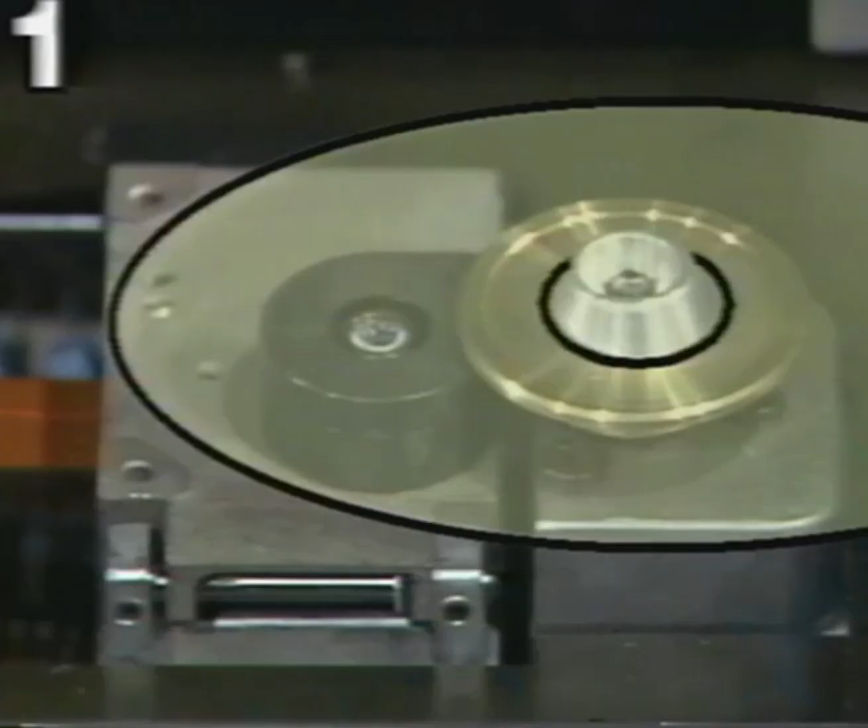The CD player uses a sharply focused beam of light from an integrated laser pickup assembly for the same purpose. Just as the condition of the stylus determines the quality of the signal extracted from a recording, the degree of focus and the intensity of the light beam affect the quality and amplitude of disc signals. If the beam is severely out of focus, the extracted signals are marginal and can result in skipping or no audio, symptoms very similar to those of a worn stylus.

Alignment of the stylus with the grooves cut into a recording is largely a mechanical function, requiring only that the tone arm be weighted in some manner so that the stylus tracks and stays within the groove and does not skip from one groove to another. An adjustable tone arm weight is generally used for this purpose.

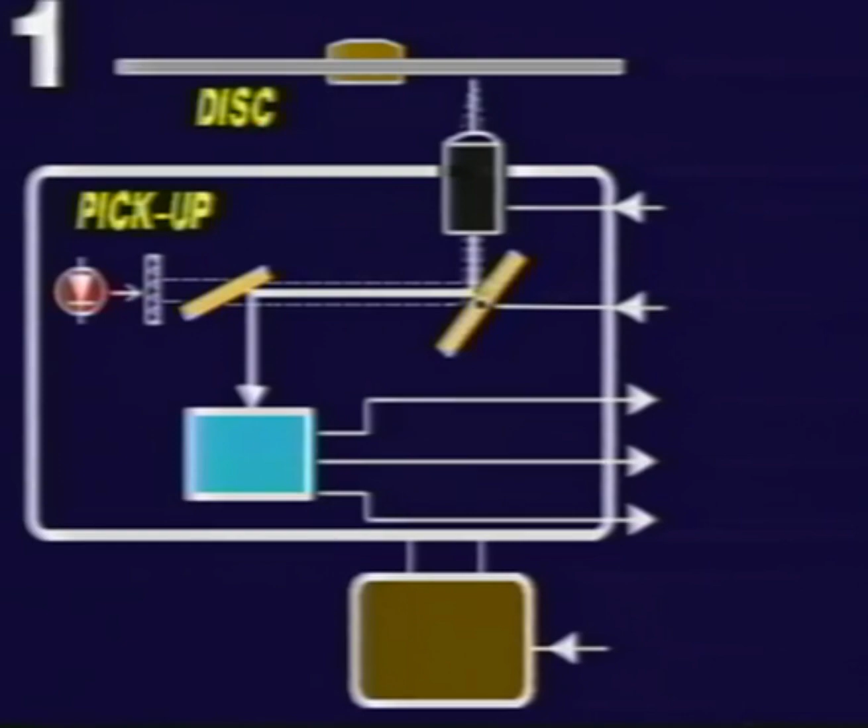Compact discs do not have grooves, nor does the pickup device directly contact the surface of the disc. Additional beams of light from the laser pickup are used to determine and correct the position of the pickup by feeding information to a tracking circuit within the player. Tracking error signals are generated by the pickup assembly, amplified by the tracking circuitry, and directed back to the pickup to control the internal tracking device.

If tracking correction is too great, the CD player generally registers error. Insufficient tracking correction will result in track skipping. A detailed description of the tracking circuitry is found in Section 4 of the tape.

To summarize, then, CD players must coordinate 4 functions in order to play a disc: 1. Activate the laser. 2. Focus the laser beam. 3. Apply tracking control to the pickup assembly. And 4. Activate the disk drive system to rotate and control the speed of the disk. Let's take a look now at the sequence of operations as applied to a typical CD player.

Most players follow one of 2 basic operational sequences. The first operational format automatically reads a table of contents at the start of the disk as soon as the disk is inserted into the player. When the table of contents is read, the player goes into the stop mode. The play button must then be pressed to engage normal play.

The second operational format does not automatically read the table of contents when a disk is inserted. When the play button is pressed, the table of contents is read and the unit automatically engages the play mode. Both formats are operationally similar with these exceptions. For the purpose of explanation, we will concentrate on the first operational format.

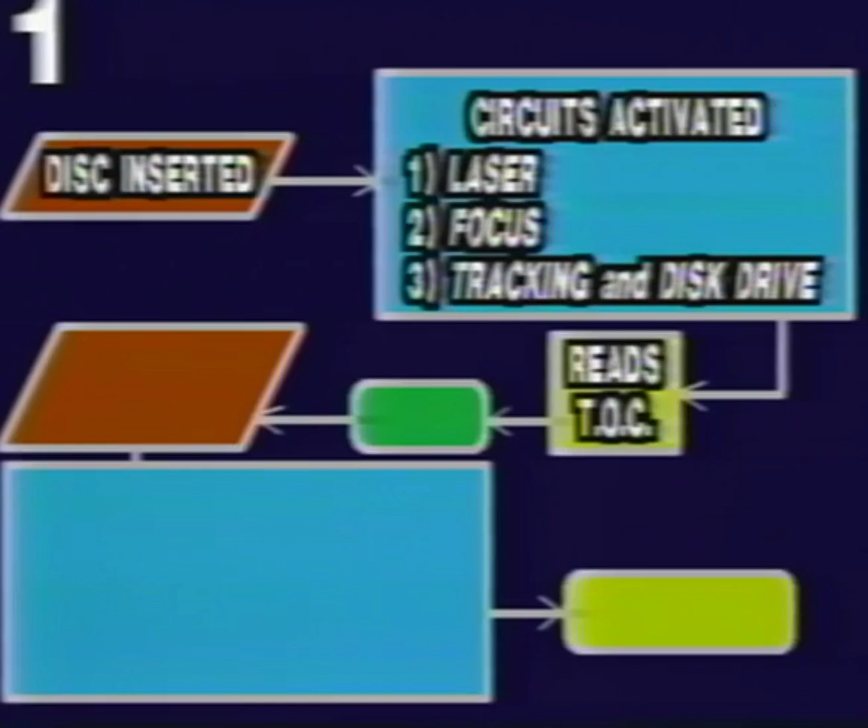When a disc is inserted in the player, the laser diode in the pickup assembly is activated. At the same time, the focus circuitry is enabled. The unit searches for good focus, and when found, the tracking and disk drive circuits are activated. The disc rotates and the table of contents is read, after which the player goes into the stop mode. When the play button is pressed, the laser, focus, tracking, and disk drive circuits are activated, and the disc is played.

Now let's correlate the sequence of operation with the overall block diagram of a typical compact disc player. When a disc is inserted, the laser diode is activated.

If no light is emitted from the laser, the unit registers error and goes into the stop mode. If the amount of light is insufficient, or laser power is low, the unit might play, but will intermittently register error and stop, or intermittently skip tracks while playing. Laser power measurement and adjustments are covered in Section 2 of the tape.

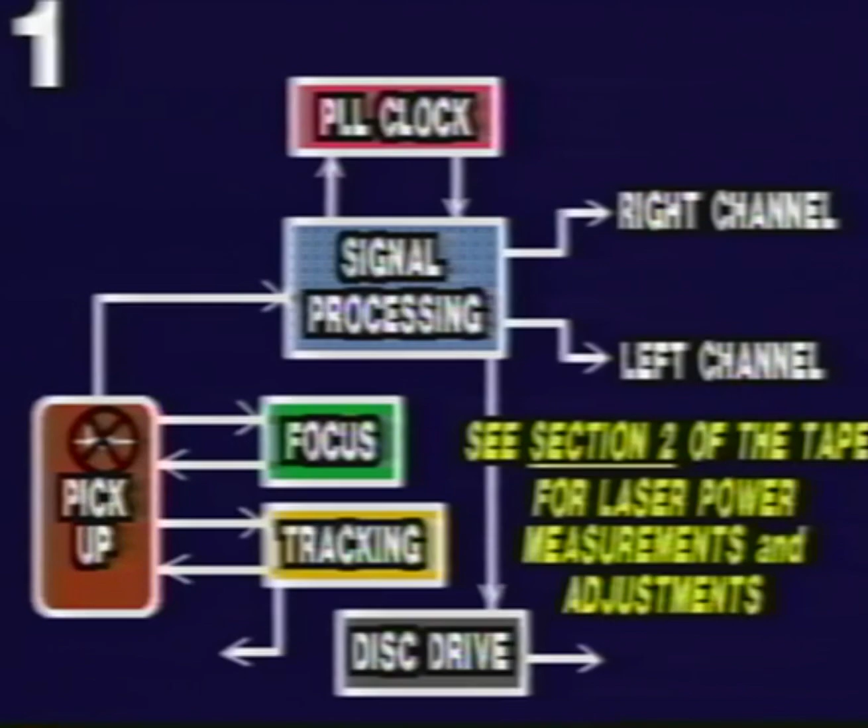The focus circuitry is activated at the same time as the laser diode. When the focus circuitry is activated, it searches for good focus, and when found, amplifies the focus error voltage from the pickup assembly and applies it back to the lens control circuitry in the pickup. If good focus is not found, the unit registers error and goes into the stop mode before the disc rotates.

If focus is found, the tracking and disk drive circuits are enabled, allowing the disk to rotate, and the table of contents is read. The player will engage the stop mode following this operation. If focus is not maintained, the disk will rotate momentarily, but the table of contents will not be read and the unit will register error. The focus circuitry is described in detail in Section 3 of the tape.

Even if a tracking or disk drive problem exists, the table of contents will usually be read. However, the unit will usually register error and stop when the play mode is engaged. Pressing the play button activates the play mode by enabling the laser diode, focus, tracking, and disk drive circuitry.

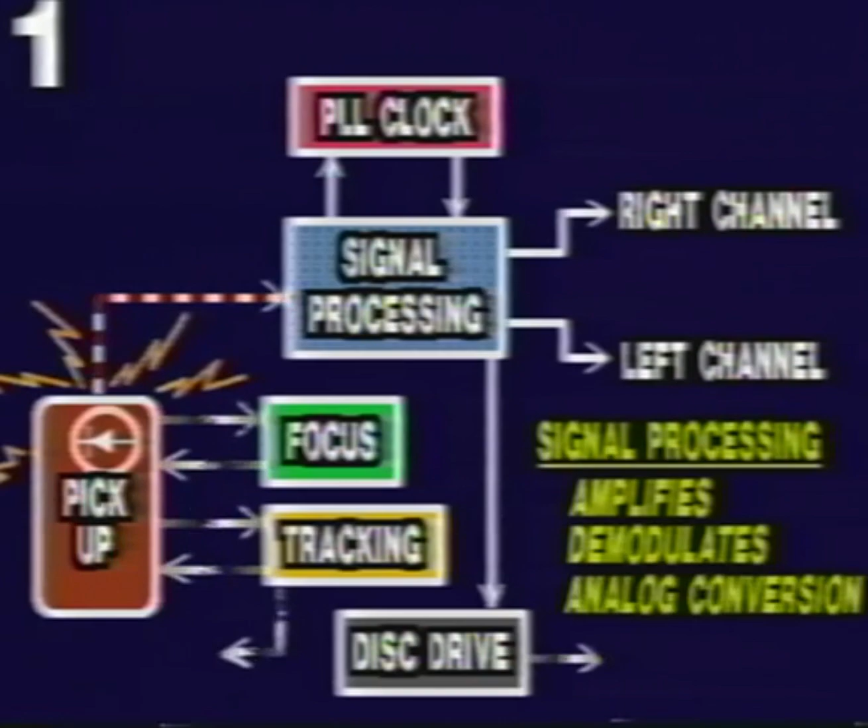The signal processing circuitry in a disk player receives the digital data from the disk and amplifies, demodulates, and converts it to analog right and left channel signals.

The PLL clock circuitry generates a 4.321 MHz signal that is synchronized to the digital data from the disk. The clock signal is required in the demodulation process and is also directed to the disk drive circuitry. An incorrect PLL clock frequency would denote incorrect disk rotational speed.

The digital signal from the pickup is viewable after amplification. The wave shape is an eye-pattern waveform and is referred to as the high-frequency HF signal or the radio frequency RF signal, depending on the specific model disk player. The eye-pattern waveform is one of the more common signals used during alignment. It is used when performing many of the servo circuitry and pickup assembly adjustments.

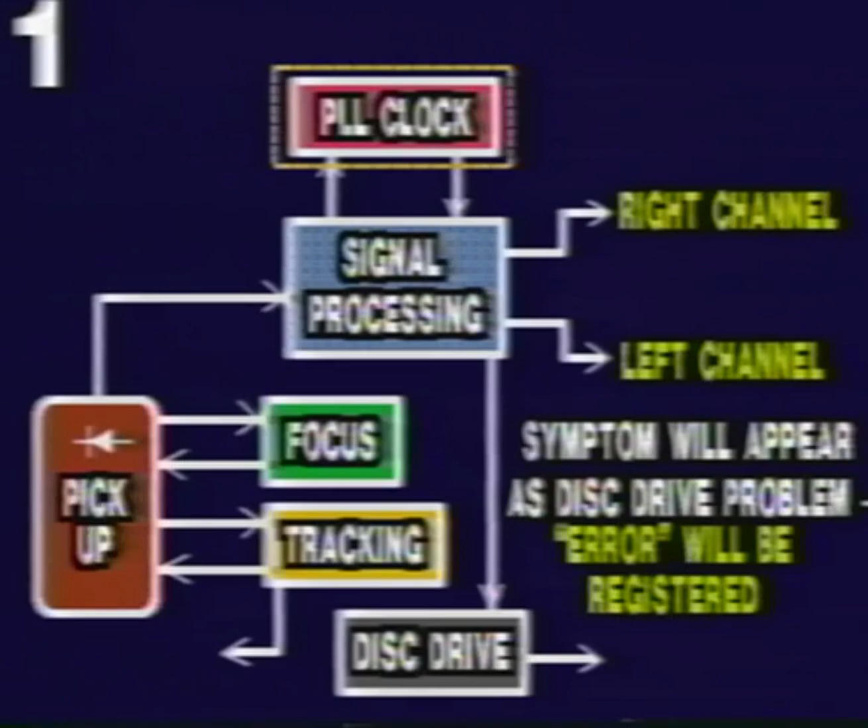Problems in the signal processing circuitry are rare. If one does exist, the unit will usually remain in the play mode, and the problem will be apparent in the reproduced audio. If a problem exists in the PLL clock circuitry, it would appear as a disk drive problem, and error would be registered.

On most compact disc players, the laser power emitted from the pickup lens is very low, approximately 0.3 to 0.4 milliwatts. In addition, the focal point of the beam is only 1 millimeter away from the lens. With the low power level and extremely close focal point, there is little chance of injury from the laser. However, as a safeguard, we suggest not looking back through the lens at the laser.

The pickup assembly itself is not considered serviceable and is treated as an individual component. However, it must be remembered that the pickup assembly is tied to 4 major external circuits: laser power control, signal processing, focus, and tracking. All external circuitry should be eliminated as the cause of the problem before pickup assembly replacement is considered. In addition, there are several mechanical adjustments affecting the operation of the pickup assembly.

Mitsubishi has used 2 basic types of pickup assemblies: an earlier version which incorporates a tracking mirror, and a later version that has no tracking mirror but a complete self-contained optical unit within the assembly. This is a simplified drawing of an earlier version pickup assembly.

When enabled, the laser diode generates light which is directed to a diffraction grating or plate. The grating splits the laser beam into 3 separate beams. The center beam is utilized to convey digital data and focus error data.

The digital data from the disk forms the HF signal, which is directed to the signal processing circuitry, and the focus error signal is applied to the focus circuitry. The 2 outer beams are used to form the tracking error signal, which is directed to the tracking circuitry. On the majority of CD players, the diffraction grating is adjustable and does have a great effect on tracking.

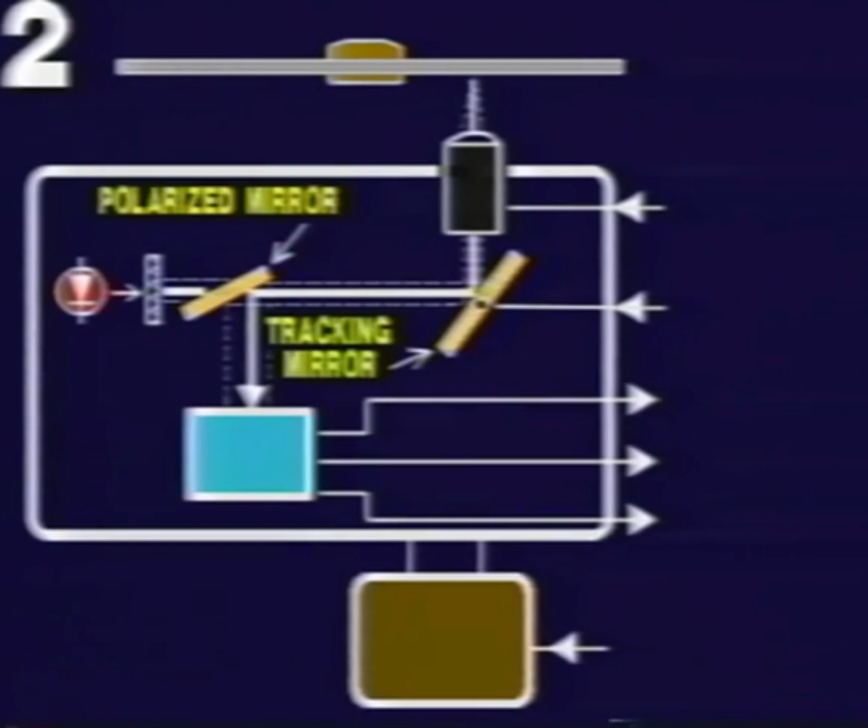All 3 beams from the diffraction grating pass through a polarized mirror to the tracking mirror. The tracking mirror deflects the beams through the lens to the disc. Reflected light from the disc passes back through the lens, is deflected by the tracking and polarized mirrors to the photodetector assembly. The photodetector converts the light signals to three electrical signals: digital data, focus error, and tracking error, that are output from the pickup.

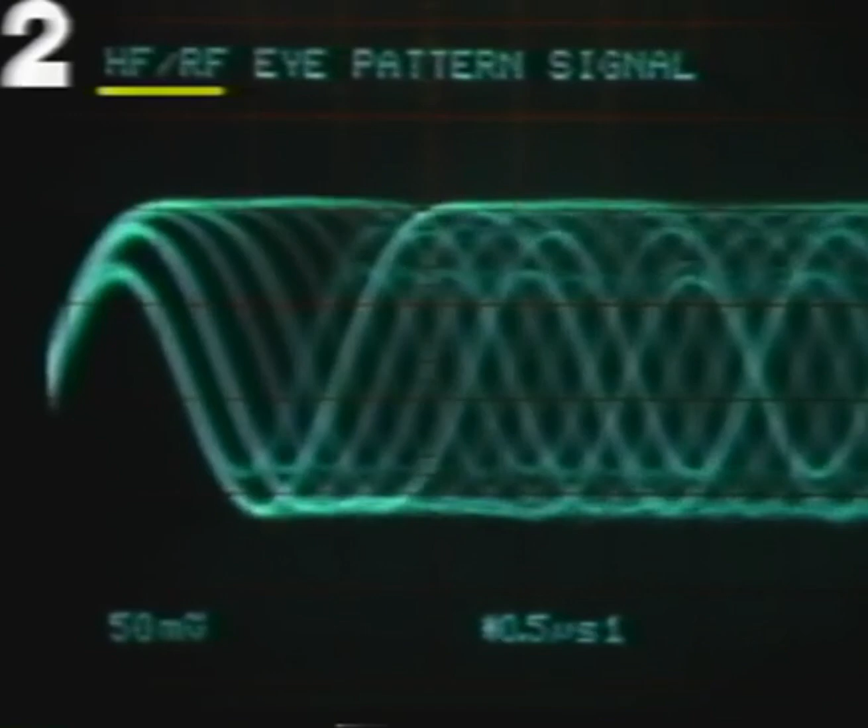The three signals are too small to view directly out of the pickup, but may be viewed after amplification. The digital signal is denoted as the high frequency HF or radio frequency RF signal. The HF signal is the familiar eye pattern used for many of the adjustments in the disc player. The focus error FE and tracking error TE signals appear to be random noise. Their amplitudes depend on the degree of error.

Focusing is achieved by moving the lens in a plane perpendicular to the disc. The lens position is controlled by the focus control FC voltage from the focus circuitry, which is covered in Section 3.

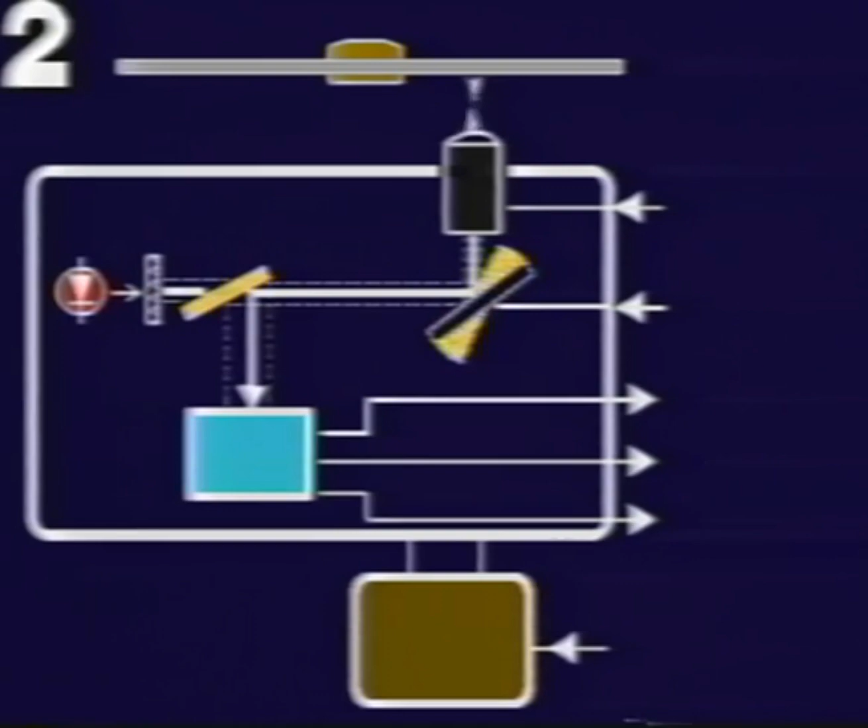Tracking is achieved by varying the inclination of the tracking mirror, which in turn moves the laser beam horizontally across the disc. When the tracking mirror reaches the end of its range, momentary drive is applied to the slide motor, which moves the complete pickup assembly slightly.

At the same time, the tracking mirror is reset to its starting position, and the cycle is repeated. The mirror inclination and slide motor are controlled by voltages developed in the tracking circuitry, covered in Section 4 of the tape.

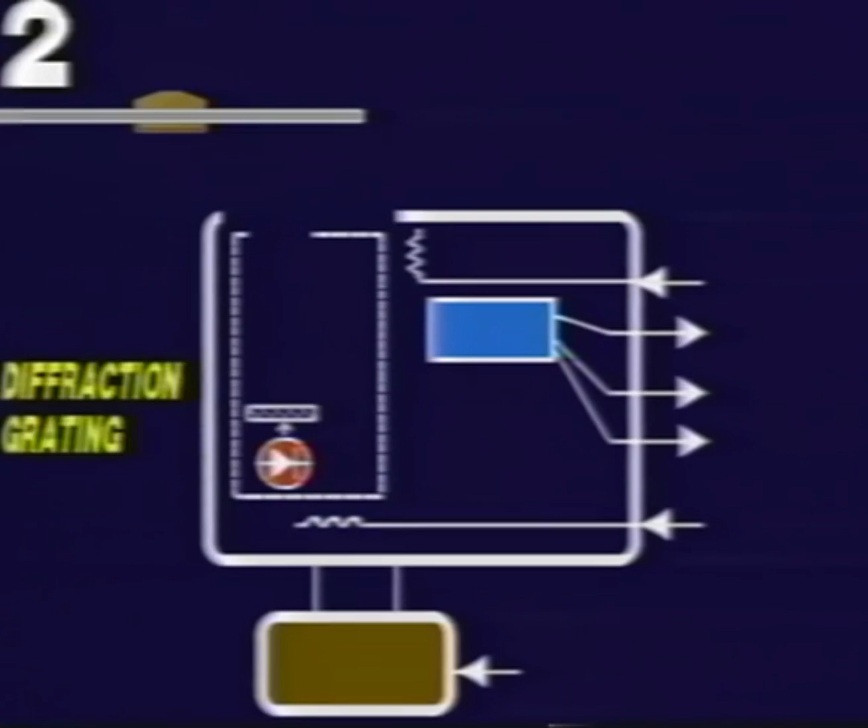On later version pickup assemblies, there is no internal tracking mirror. There is a self-contained optical unit internal to the pickup, containing the laser diode, diffraction grating, polarized mirror, lens, and photodetector.

To maintain focus and tracking, the complete optical unit is moved. Focus correction voltage moves the unit in a plane perpendicular to the disc, and tracking correction voltage moves the assembly parallel to the disc.

On the later version of pickup assemblies, the preamplifiers for the HF, focus error, and tracking error signals are internal to the pickup assembly. Therefore, all three signals may be viewed on an oscilloscope directly out of the pickup.

The amount of laser power emitted from the pickup assembly lens varies between the various model CD players. The value for each model player is given in its respective service manual.

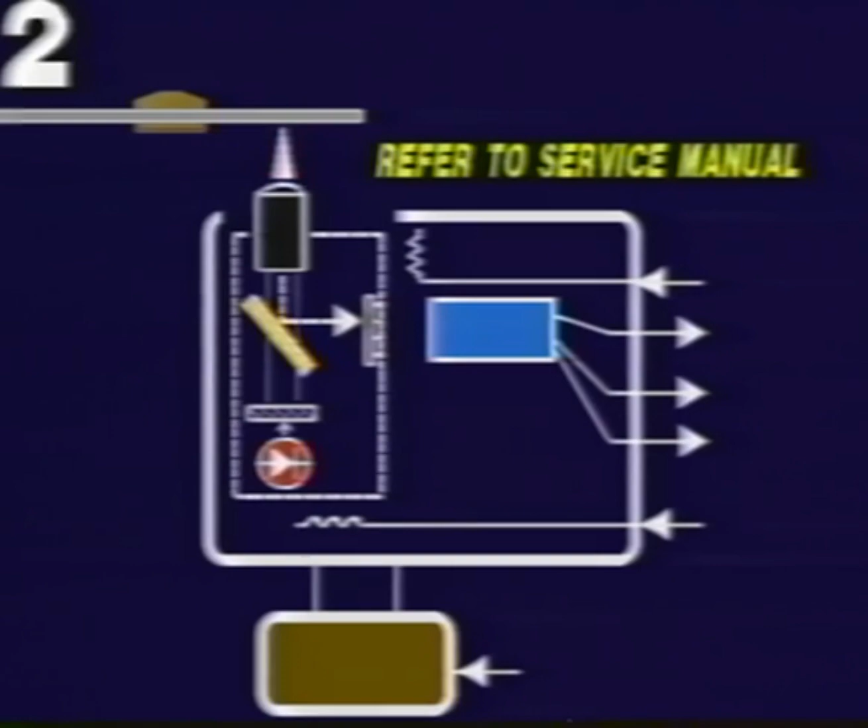If there is no laser output from the lens, the unit will register error and go into the stop mode. If the laser power is too low, focus and tracking may not be achieved, and the amplitude of the HF signal will be low. If laser power is excessive, both tracking and focus error signals will also be excessive, and usually tracking will not be maintained, causing error to be registered.

Although the procedure for checking and adjusting laser power is similar on all CD players, refer to the service manual for the specific model. Laser power is measured without inserting a disc in the unit. On some models, the disc clamp assembly must be removed to give access to the pickup lens.

To activate the laser, the disc sensor photodetector must be covered with tape. Power to the laser is usually activated by shorting two test points given in the service manual. Some units are designed with built-in test modes. Refer to the service manual for the test mode activation procedure.

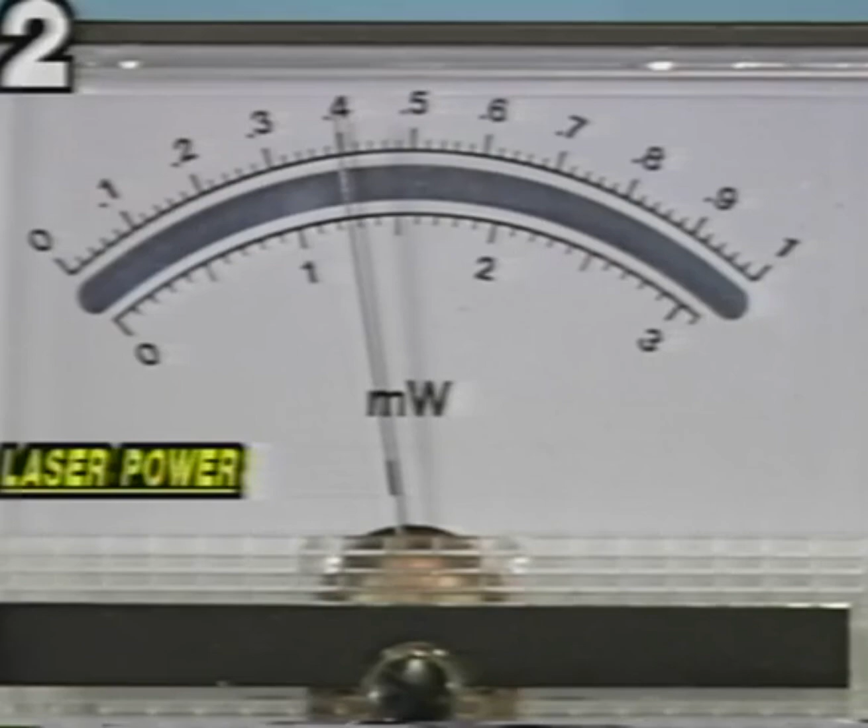When the laser is enabled, insert the laser power meter sensor in front of the lens and read the power reading on the meter. If the power is incorrect, rotate the laser power adjustment until the reading corresponds to that given in the service manual. Laser power range usually falls in the area of 0.3 milliwatts to 0.4 milliwatts.

One of the most important operations carried out by a CD player is altering the focal point of the pickup assembly to focus the laser beam. Until acceptable focus is achieved, and the microprocessor is notified of this fact, the play operation will generally be terminated.

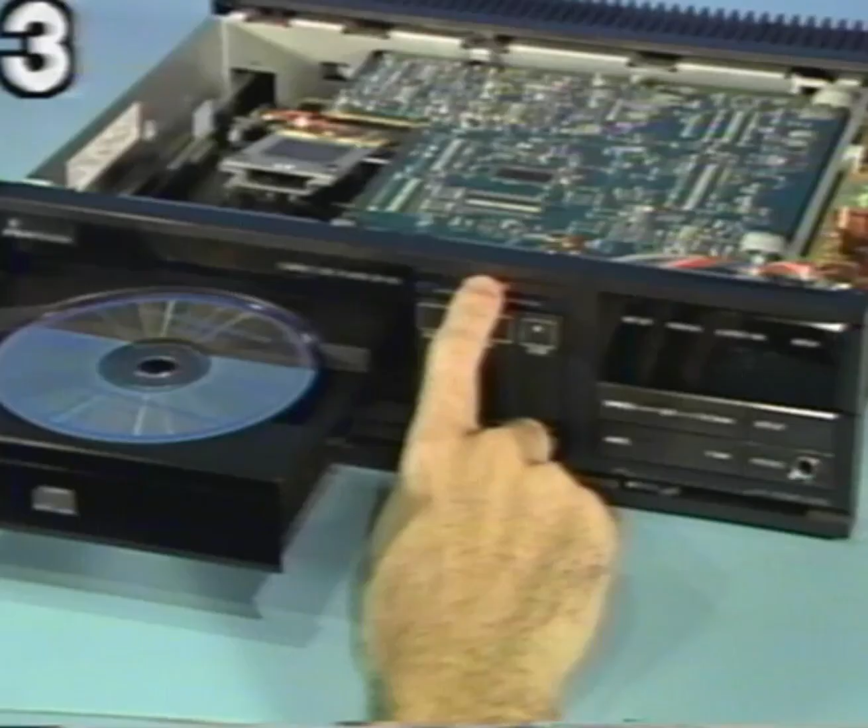This section will explain the operation of the circuitry responsible for the focusing operation, beginning with the first step in the operational sequence of the CD player, reading the table of contents on the disc.

If the disc player will not read the table of contents on a disc, it usually points to a problem in the focus circuitry, a servo system that controls the position of the pickup assembly in relation to the disc to assure that the laser beam generated by the pickup is sharply focused. A marginal focus problem may show up as track skipping or intermittently registering error during play.

A thorough understanding of the operational sequence of a CD player is extremely valuable when troubleshooting the focus servo circuitry. Therefore, let's review in greater detail the operational sequence of most disc players.

When a disc is inserted, the lens in the pickup assembly searches for good focus. On some players, focus search is not activated until the play button is pressed. If focus is not found, the unit registers error and stops.

If rough focus is achieved, the focus servo is enabled and the laser beam is precisely focused. If sharp focus is not achieved, the unit registers error and stops.

When sharp focus is achieved, the disc momentarily rotates and the table of contents is read. After the table of contents is read, the unit goes into the stop mode or directly into play, depending on the design of the player.

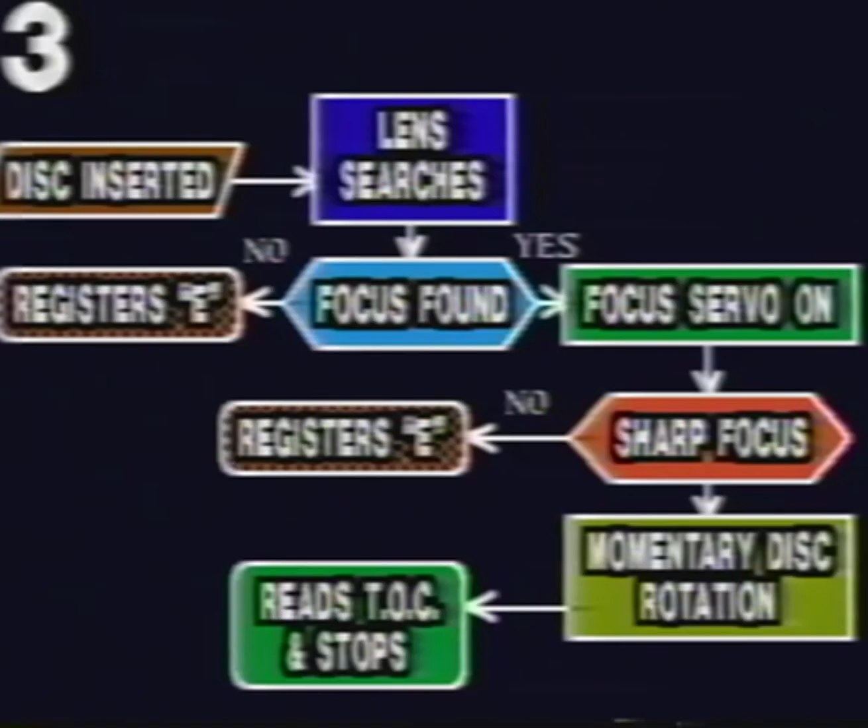Correlating the operational sequence to the basic block diagram of the focus circuitry, the drawer and disc sensors inform the control circuitry that a disc is inserted in the unit. The control circuitry responds by generating a focus search command. The search circuitry drives the lens through its range, attempting to find a rough focus point.

As the lens searches, the autofocus OK circuitry, sometimes referred to as HFOK, monitors the audio data from the disc, denoted as the high frequency or HF signal. As the focal point is approached, the HF output voltage increases. When the autofocus OK circuitry senses the presence of the HF output, it generates a logic change on the AF-OK line, informing the control circuitry that rough focus has been attained.

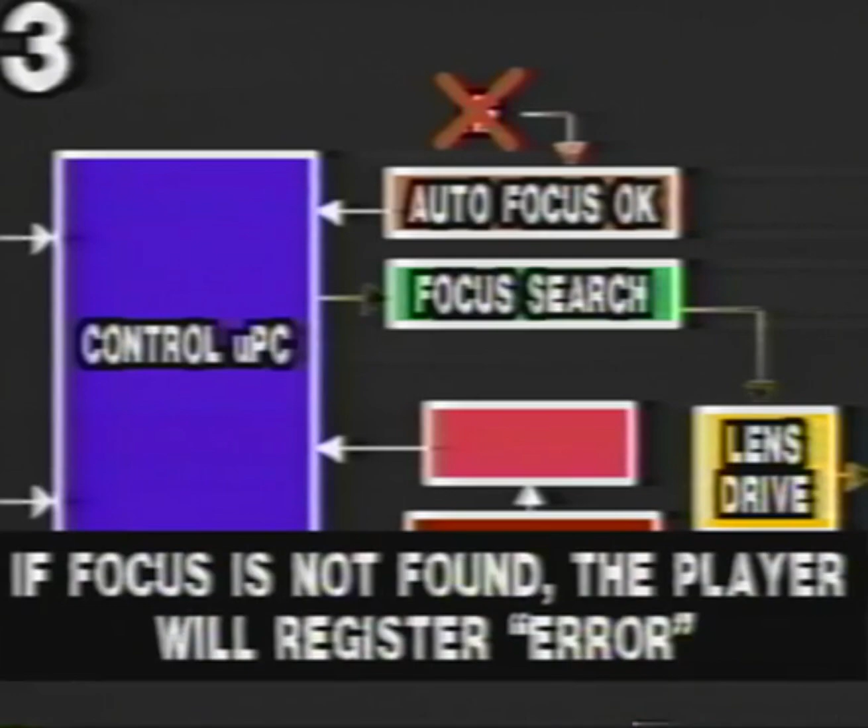If the focal point is not detected, the lens is driven through the search cycle 3 times. Following 3 search cycles, if the rough focal point is still not detected, the unit will register error and stop. Also, if the lens does not move smoothly up and down during these focus search cycles, the lens might miss the optimum focus point and the player will again register error.

Once the rough focus point is detected, the control circuitry terminates the search command and generates logic on the focus on line to enable the focus servo circuitry. The focus servo amplifies the focus error voltage from the pickup assembly and directs it to the lens drive in the pickup as the focus control, or FC, voltage.

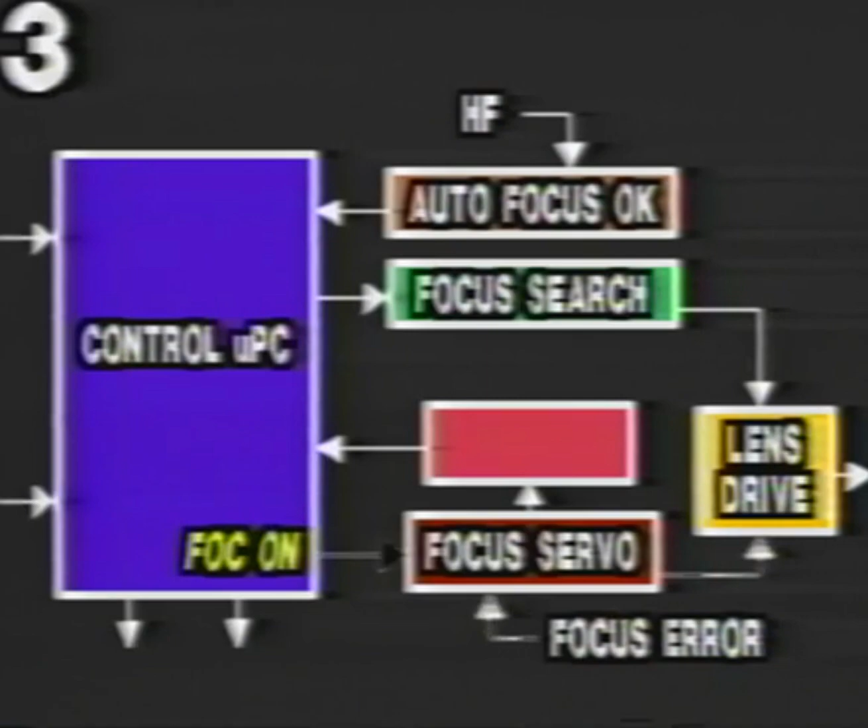When sharp focus is achieved, the focus OK circuitry generates a logic change on the focus OK line, informing the control circuitry that sharp focus has been attained. On some players, the focus OK line is denoted as focus zero cross.

The control circuitry responds to the logic change on the focus OK line by generating momentary commands, enabling the tracking and disk drive servos. The disk momentarily rotates and the table of contents is read.

On later disk players, fewer discrete components are used and most of the command and status data is transferred over serial lines. On these players, the control microprocessor is informed that a disk is inserted by the logic on the drawer sensor and disk sensor lines. The microprocessor responds by generating a focus search command.

On this type of player, all commands between the microprocessor and the servo IC are transmitted on a single serial data line, usually denoted as data out or microprocessor serial data, MSD.

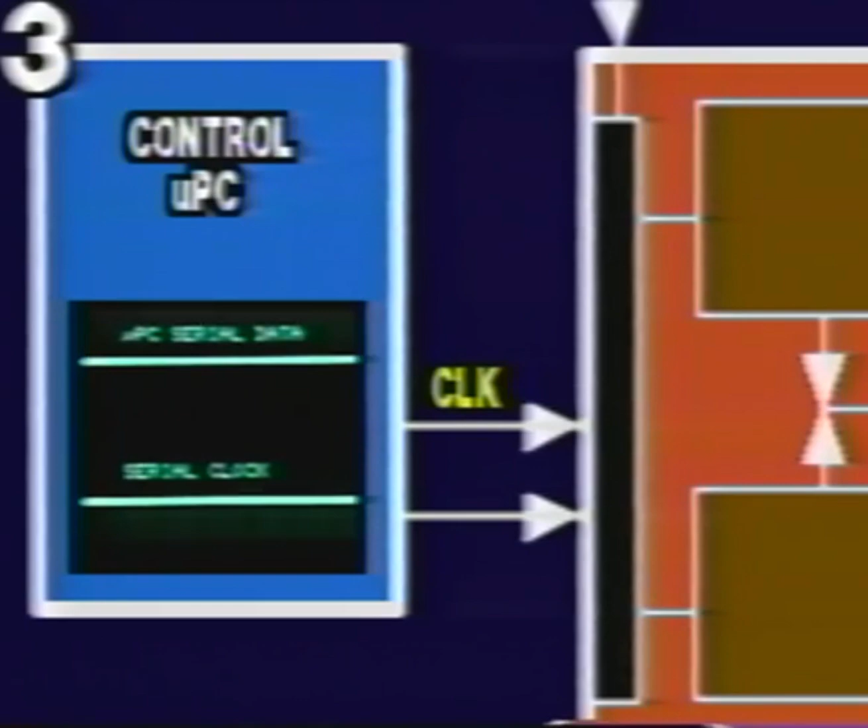The logic on the command data line is constantly changing and is present only during the reading of the table of contents or while accessing the play mode. A serial clock signal is utilized to time the transfer of data from the microprocessor to the servo IC. The clock signal is present only during the transmission of data.

The microprocessor also generates a latch signal which enables the servo IC to accept commands from the microprocessor. The latch signal is usually denoted as MLA or XLT and is also present only during the time of data transmission. All three signals, data, clock, and latch, must be present in order for the servo to accept a command.

Although only the focus circuitry is shown in the servo IC in this diagram, in most players the tracking servo is also internal to the IC.

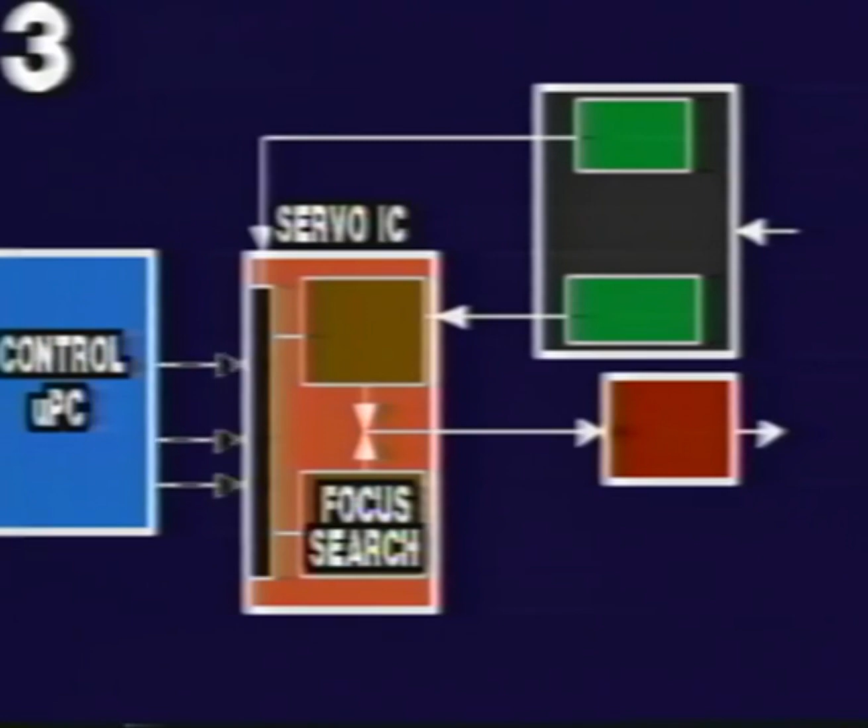When focus search is activated, lens drive is generated from the focus correction output of the IC and is directed to the focusing coil in the pickup assembly.

The HFOK circuitry is usually internal to the preamp IC, and its output is directed to the servo IC. The servo IC then informs the microprocessor that focus has been found by way of a serial servo status line, usually designated as sense or servo data out.

Only the momentary change on the status line can be checked in this system.

When informed that focus has been found, the microprocessor generates commands to activate the focus servo. At the same time, commands are generated to activate the tracking and disk drive servo. The disk then rotates and the table of contents is read.

The unit then goes into the stop mode or continues on into play, depending on the design of the player. Any malfunction during this operational sequence will cause the player to register error.

By noting the point in the operational sequence where error is registered, the section of the focus circuitry causing the problem can usually be localized. If the table of contents is not read, note whether or not the disk rotates.

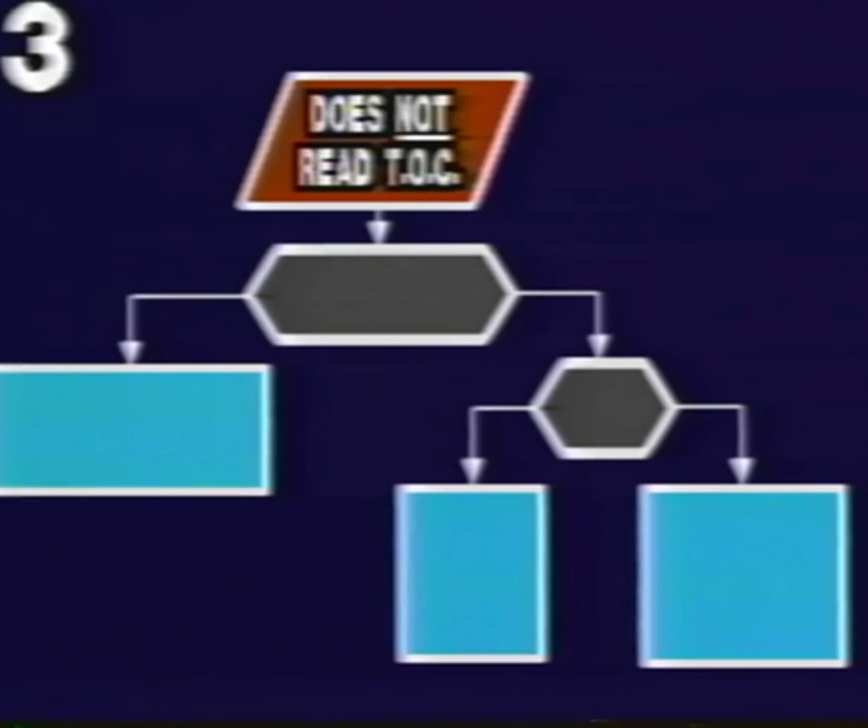If the disk does not rotate, check the search and HFOK circuitry. To do this, activate the focus search mode without inserting a disk in the unit. The disk sensor circuit must be activated.

Various types of disk sensors have been used in different models. An optical sensor can be activated by covering the phototransistor with black tape. If a mechanical switch is used, merely short across the switch.

On some units, the focus search cycle itself is used as the disk sensor, so it will automatically go into the focus search mode. When the disk sensor is activated, close the drawer and observe the lens. It should cycle through its range 3 times.

If the lens does not cycle, check the search circuitry. On older players with more discrete components, check for the focus search command from the microprocessor. If the command is present, check the search drive circuitry and the pickup assembly. In checking the pickup, check for an open focus coil and make sure the lens assembly is not frozen in position.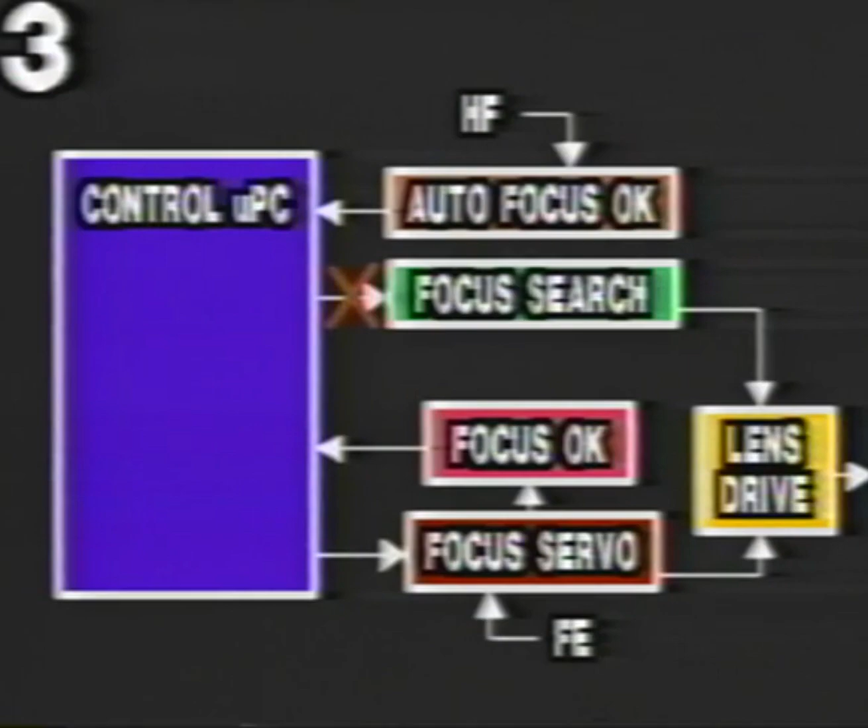If no search command is generated from the microprocessor, check the logic from the disk and drawer sensors. If the sensor logic is incorrect, check the sensors and their associated circuitry. If the sensor logic is okay, check the microprocessor.

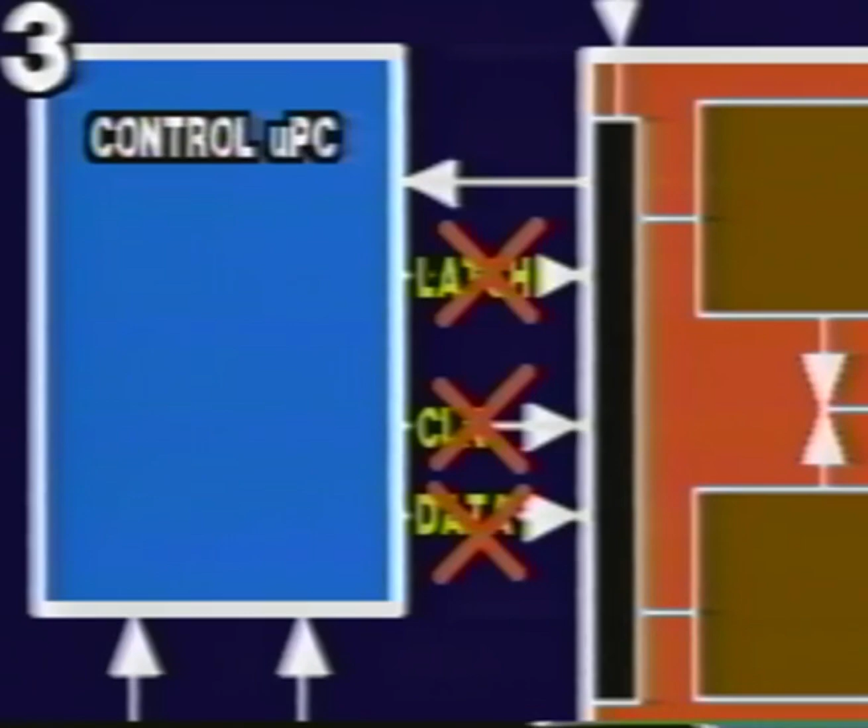If the lens does not search on newer players, check for the presence of the serial command data, the serial clock, and the latch. If any or all of the three signals are missing, check the drawer and disk sensor logic. If logic is incorrect, check the sensors, but if the logic is normal, check the microprocessor.

If the data, clock, and latch signals are all present, check for search drive at the output from the focus servo. If drive is present, check the pickup for an open focus coil and a frozen lens assembly. If no search drive is present, check the servo IC.

If the lens searches but the disc does not rotate, use a laser power meter and check the laser power output as described in section 2 of the tape. If there is no laser power or the power is incorrect, check the laser power supply and the pickup assembly itself as described in section 2 of the tape.

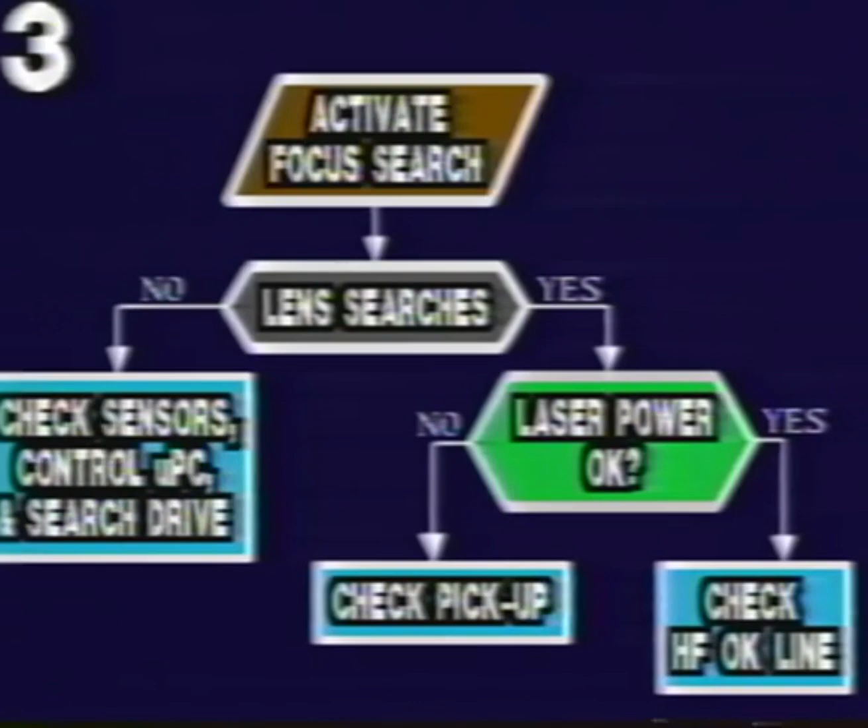If laser power is normal, check the HF-OK status line. If there is no logic change on the HF-OK line, check the preamp, HF-OK circuitry, and the pickup. If there is a logic change on the HF-OK line, check the status of the autofocus OK line.

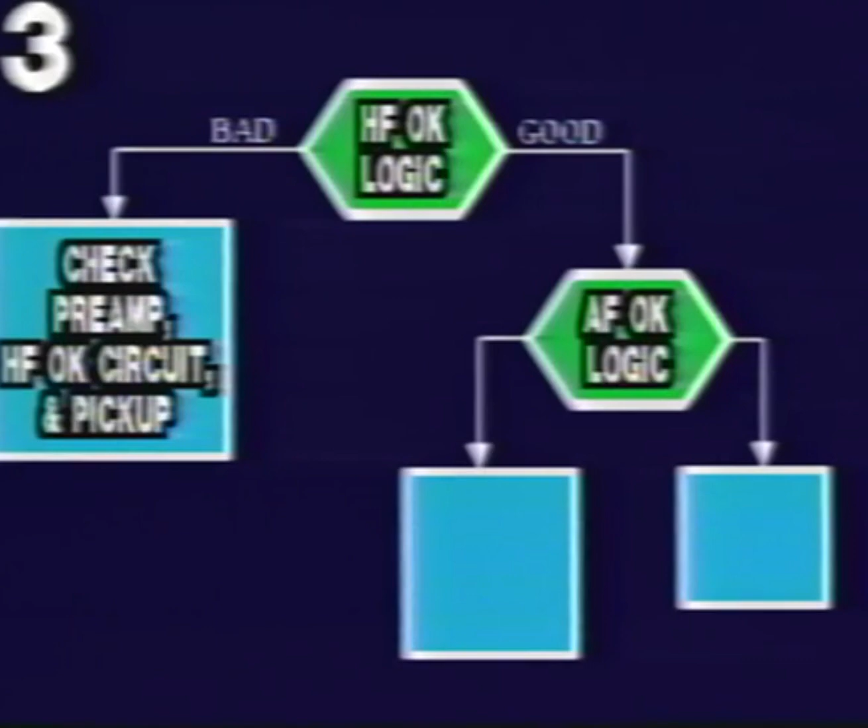On older players, merely monitor the AF-OK line for a logic change. On newer players, monitor the serial status line and ensure that data, even though momentary, is present. If AF-OK logic is incorrect or is missing, check the AF-OK circuitry on older players or the servo IC on more recent players.

If the AF-OK logic appears to be present, the problem may be in the control microprocessor.

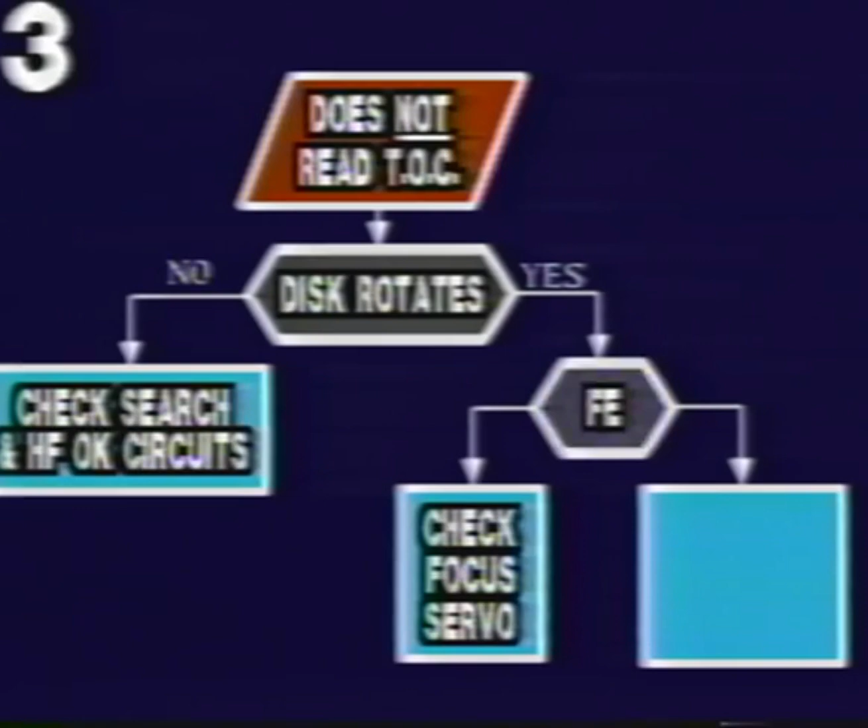If the table of contents is not read, but the disc momentarily rotates, the focus servo is probably at fault. Monitor the focus error voltage while the table of contents is being read. If the amplitude drops to approximately 0.2 volts or less, the problem may be in the tracking servo, which is covered in section 4.

If the focus error voltage does not drop to 0.2 volts or less, the problem is in the focus servo.

Basically, the focus servo amplifies the focus error voltage from the pickup assembly and directs it back to the lens control coil in the pickup as the focus correction, or FC, voltage. The amplifier is divided into two major sections: a voltage amplifier to amplify the low amplitude focus error voltage from the pickup, and a power amplifier section to drive the lens positioning device in the pickup.

If there is no focus error voltage from the pickup, the problem may be in the pickup assembly. If focus error voltage is present at the output of the pickup, but no focus control voltage at the output of the servo, look for a problem in the servo amplifiers.

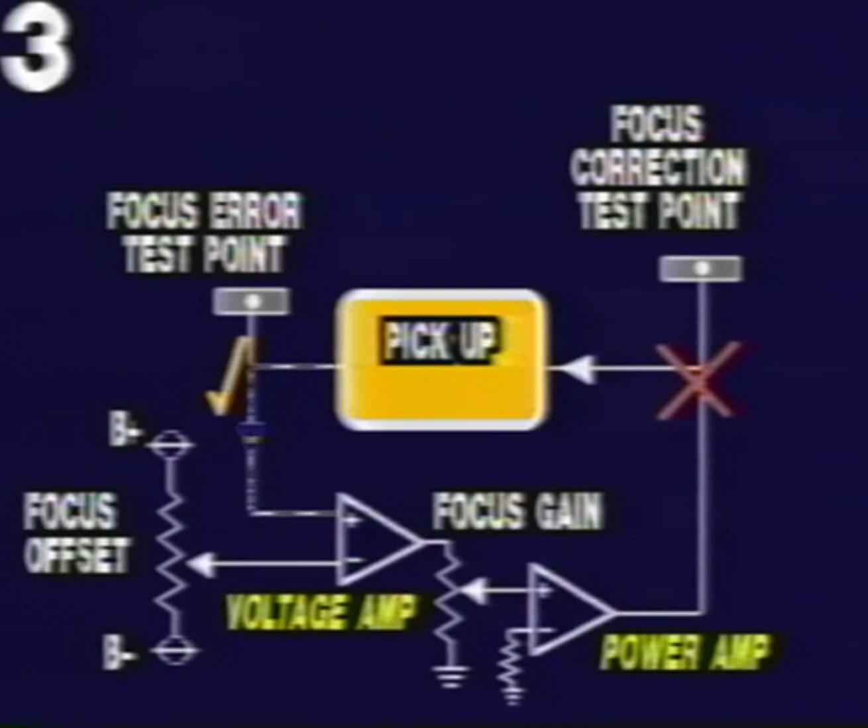There are usually two adjustments associated with the focus servo. An offset adjustment compensates for component variances. Its purpose is to set the output of the voltage amplifier to zero when focus is correct.

A rough adjustment of the focus offset may be made while viewing the focus error voltage and adjusting the offset for a symmetrical and minimum amplitude focus error signal. A fine adjustment is usually made while viewing the HF signal in the signal processing circuitry and adjusting the offset for the sharpest eye pattern.

The focus gain adjustment sets the level of the focus correction voltage feedback to the pickup. Of course, if the gain adjustment is too low, focus may be lost completely or intermittently, causing the player to register error or skip tracks, depending on the degree of the misadjustment.

If the focus gain is set too high, a mechanical noise is generated from the pickup due to the extreme movement of the lens.

A rough adjustment of the focus gain may be performed by increasing the gain until noise is generated from the pickup, and then backing off until the noise just disappears.

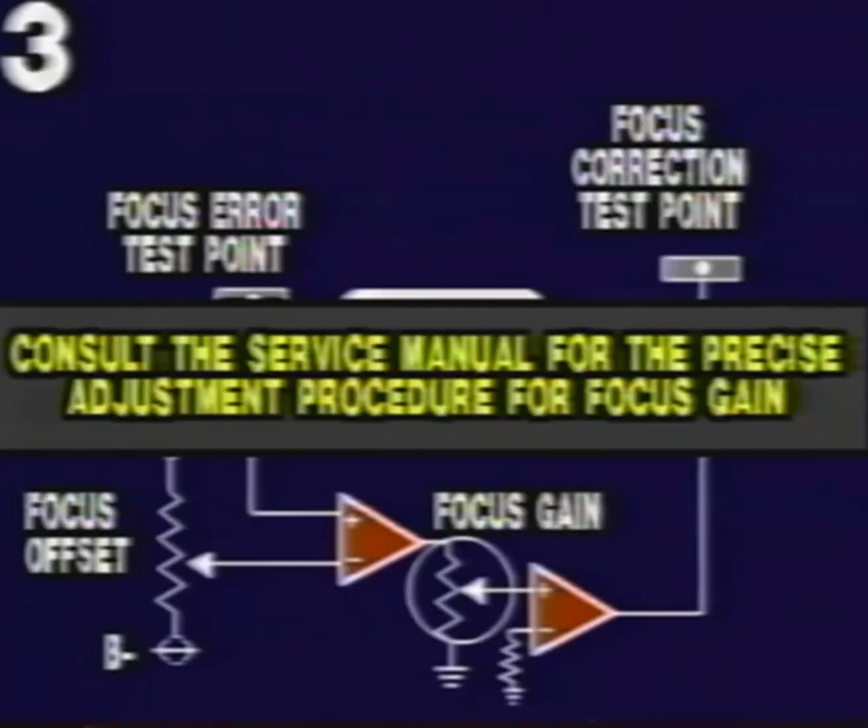Unlike a vinyl record, the compact disc does not have a groove for the pickup element of the player to follow. Therefore, the CD player requires an electronic tracking system to maintain alignment between the pickup assembly and the audio information on the disc. A tracking servo problem may show up as a multitude of symptoms: an inability to play any track of the disc, intermittent dropout or muting of the audio, an inability to perform the skip or search functions, or the player registering error while in play.

A thorough understanding of the operating sequence of a CD player is extremely valuable for troubleshooting the tracking servo. Let's review this sequence and then look at the basic block diagram of the tracking circuitry.

When the player loads a disc, the control system will first reset the servo systems to the start position. Focus, tracking, and disc servos will all be off, and the slide containing the pickup assembly will be set to the inside stop, which places the pickup at the lead-in track of the disc. This is the track closest to the disc center.

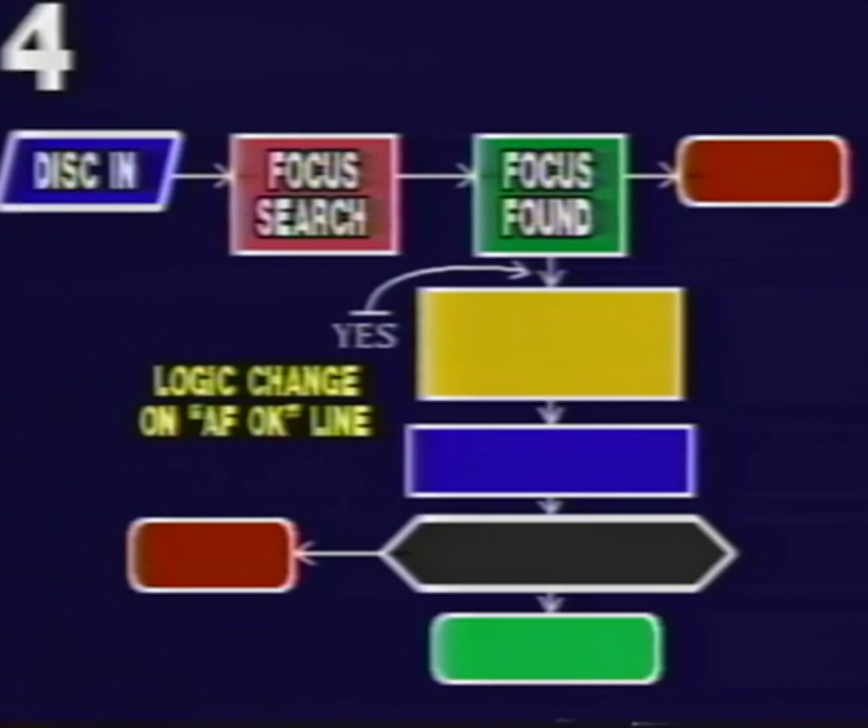Once the servo reset is complete, the laser is enabled and the lens in the pickup assembly searches for rough focus. Once the pickup lens is able to achieve rough focus, a logic change occurs on the AF-OK line, informing the control circuitry that rough focus has been attained. The control circuitry responds to the logic change by first generating a command to turn on the disc motor servo.

Once the disc begins to rotate, the focus servo system is enabled. When best focus is attained, the focus OK line will change state and the control system responds by enabling the tracking servo.

It is important to note at this point that portions of both the focus servo and the disc motor, or CLV servo, are included in the block diagram, since both of these systems must operate correctly before the tracking servo can be enabled.

More recent disc players use fewer discrete components, and most command and status data is transferred over serial lines. More information on this process can be found in Section 3 of the tape.

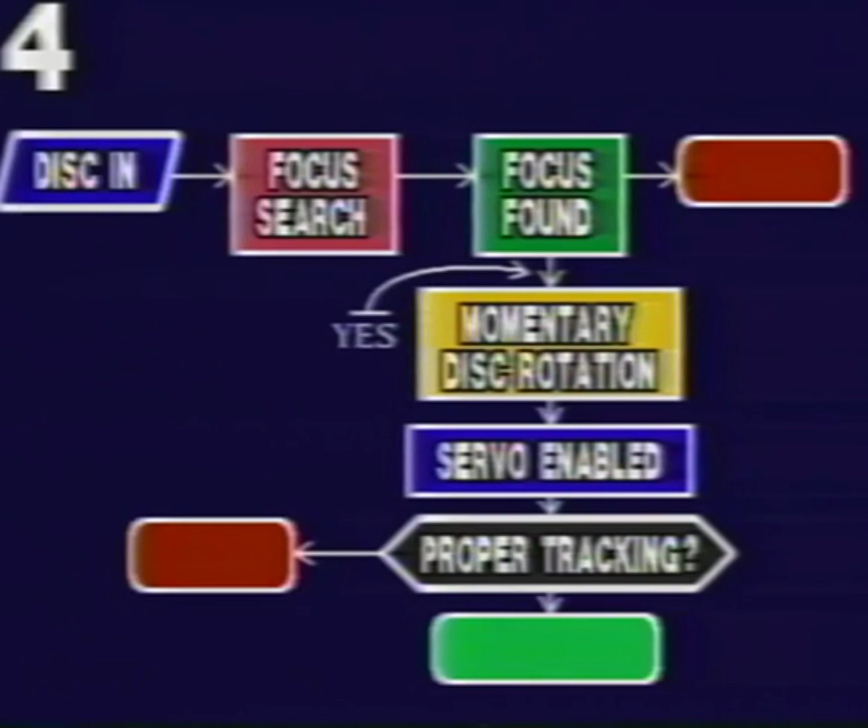After being enabled, the tracking servo attempts to track and read the table of contents portion of the lead-in track. If the tracking servo is unable to track the pits that contain the data, the player will register error and stop. If proper tracking is achieved, the table of contents data is read, and the player will go into the stop mode or directly into play, depending on the design of the player.

The tracking sensor portion of the pickup generates a tracking error signal denoted as TE on some models and TER on others. The output of the two tracking sensor diodes, E and F, will be equal whenever the laser beam is directly centered over the track. The tracking error voltage will be 0 under these conditions.

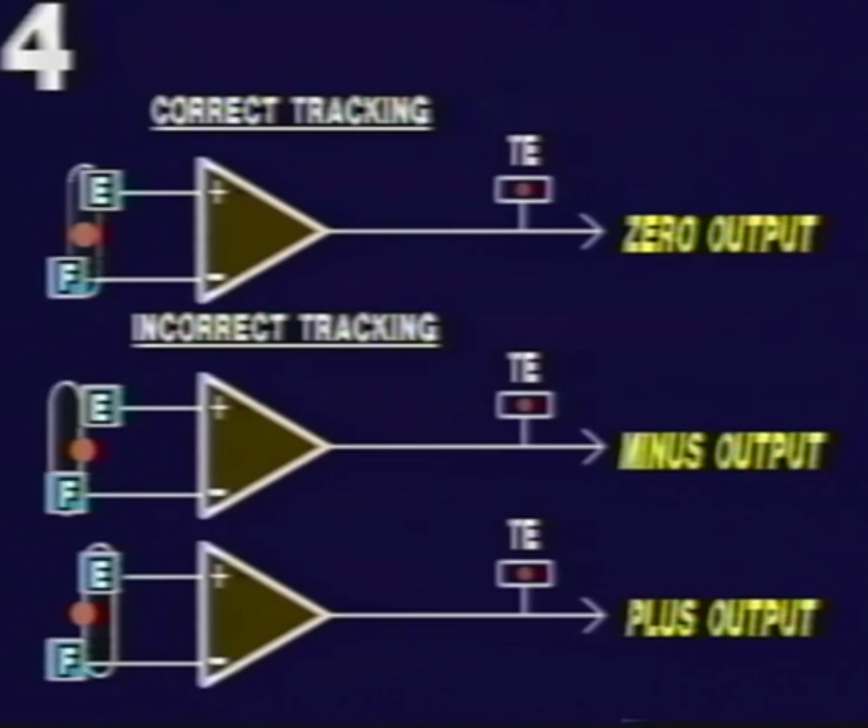However, if the tracking is offset from the correct path, the output of one sensor will be greater than the other, generating either a positive or negative tracking error signal, depending on the direction of the error. The error signal is amplified and directed to the tracking coil of the pickup assembly. The coil moves either the tracking mirror or the optical unit to achieve correct tracking.

Note, however, that one additional signal is fed to the tracking servo: the HF signal from the disc. The tracking servo must monitor this signal since equal tracking sensor output, which denotes zero tracking error, can occur at two places: when the pickup is directly over the track and when the pickup is directly between two tracks.

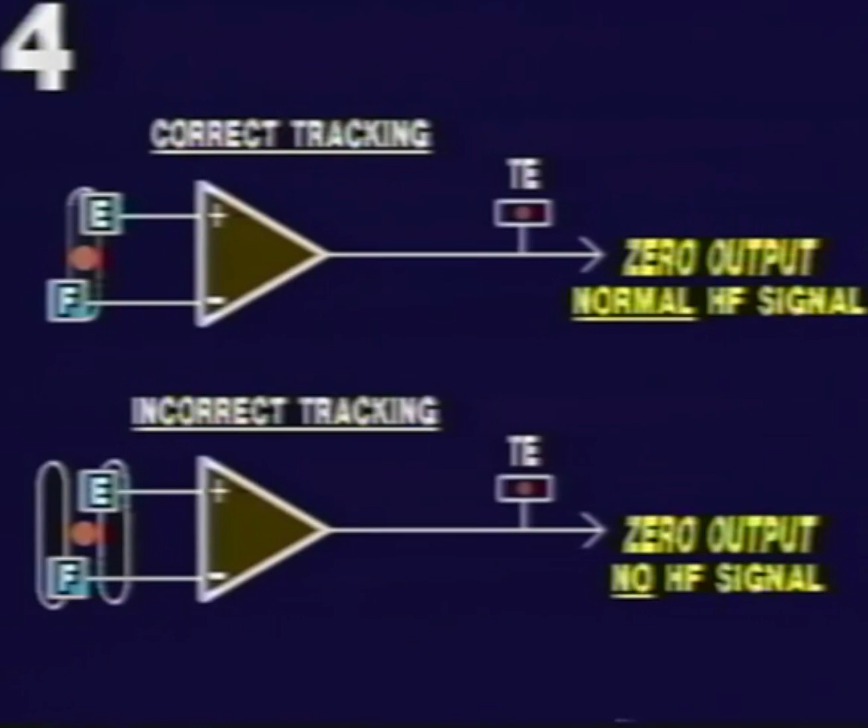If the pickup attempts to track between two tracks, the HF signal will not be present. The tracking servo will then generate kick pulses to nudge the pickup towards the track. Once the HF signal appears, the kick pulses are discontinued and the tracking servo operates normally.

The tracking mechanism within the pickup assembly has only a limited range of movement, about 5 millimeters. This range is sufficient to accommodate the lead-in track, but insufficient to track the entire compact disc.

An additional servo system called the feed motor, slide motor, or sled motor servo, depending on the player, performs this coarse tracking function. By moving the slide mechanism, to which the pickup is attached, the pickup assembly is kept roughly centered over the proper track as the disc is played.

This servo is also responsible for the movements necessary for the reset, skip, search, and programmed play functions.

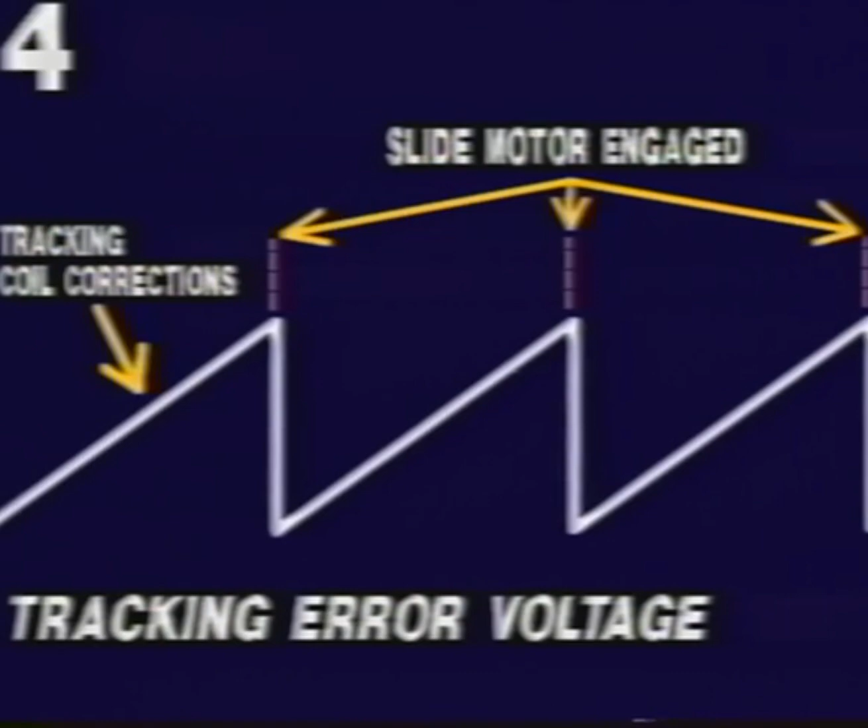As the tracking coil moves the tracking mirror or optical unit further from the center of its range, the DC average value of the tracking coil drive voltage increases. When this voltage rises to a point near the end of the tracking coil's range, the slide motor servo turns the slide motor drive circuit on. The slide will move, recentering the pickup over the track.

In certain players, the slide motor servo is part of the tracking servo, and in others, part of the control system.

Once the DC level of the tracking coil drive exceeds the threshold where slide drive is necessary, the coil drive will be removed while the slide motor drive is enabled. After the slide has been moved, tracking coil drive is resumed at a slightly higher than normal gain so that proper tracking can be achieved quickly.

The data from the disc is then read and, if necessary, kick pulses are generated to place the pickup over the correct track. Normal tracking gain is then resumed.

While the operation of the tracking servo is very similar in the skip and search modes, the actual on time of the slide motor drive will be determined by the control system of the player depending on the mode selected.

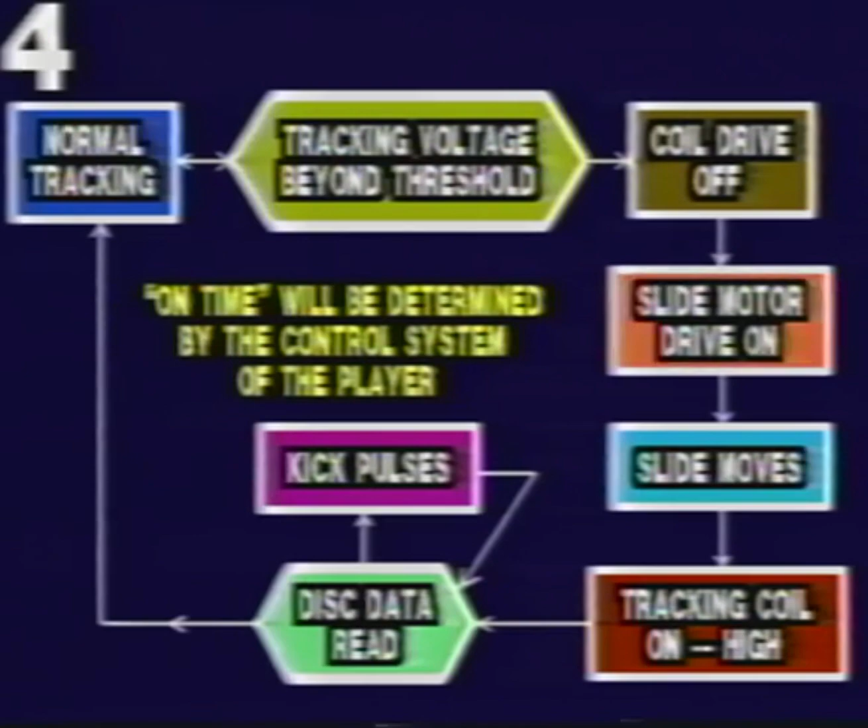By noting the point in the operational sequence where error is registered, the section of the CD player circuitry causing the problem can usually be localized.

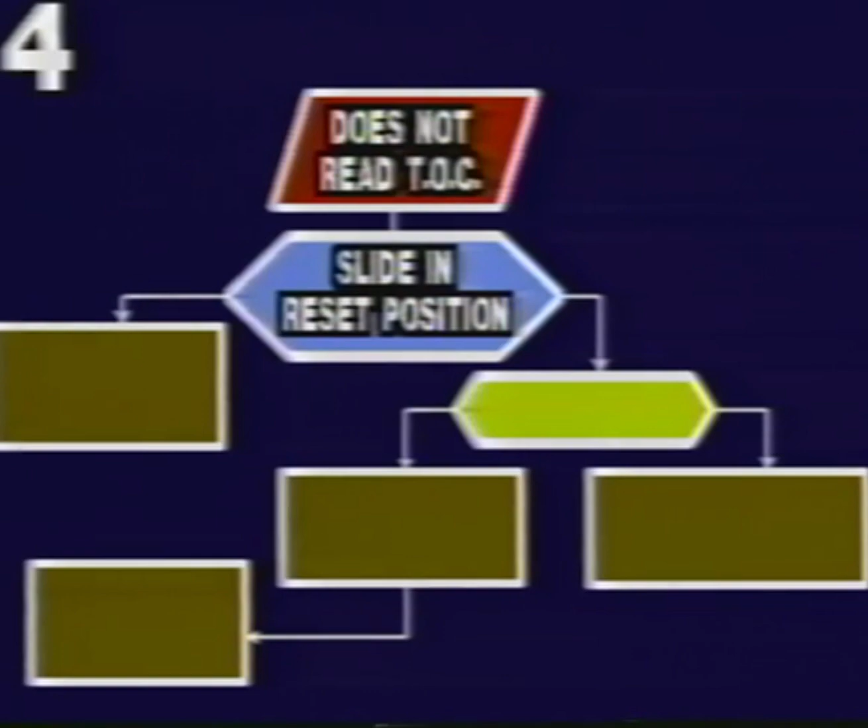Certain players will not enable the laser if the slide does not reach the inside stop. Confirm that the slide is at its reset position. If the slide will not move to this reset position, check for mechanical problems such as binding, and then, if necessary, check the slide motor drive circuitry.

If the table of contents is not read, note whether or not the disc rotates. If the disc does not rotate, check the focus and disc motor circuitry. Troubleshooting procedures for these circuits are described in sections 3 and 5, respectively.

If the table of contents is not read, but the disc momentarily rotates, check the logic change on the control line that enables the tracking servo.

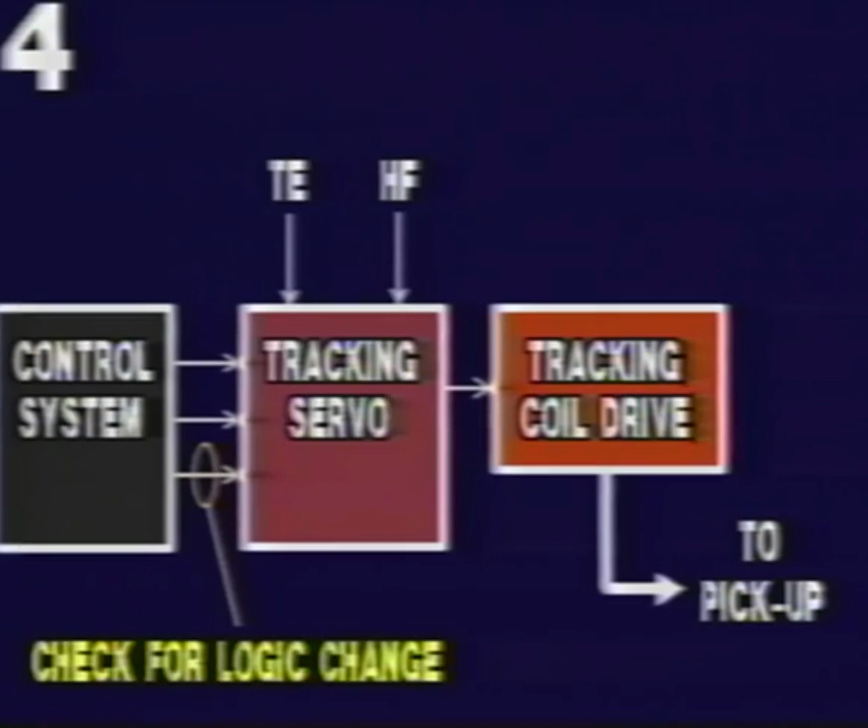If the logic on the control line does not change, check the focus servo. However, if the logic does change, the difficulty probably resides in the tracking servo.

Basically, the tracking servo amplifies the tracking error voltage from the pickup assembly and directs it back to the tracking coil in the pickup.

The amplifier is divided into two major sections: a voltage amplifier to boost the low amplitude tracking error voltage from the pickup, and a power amplifier section to drive the tracking coil in the pickup.

If there is no tracking error voltage from the pickup, the problem may be in the pickup assembly. If tracking error voltage is present at the output of the pickup, but there is no tracking control voltage at the output of the servo, look for a problem in the servo amplifiers.

There are three adjustments usually associated with the tracking servo. Remember that they may not be present on all players.

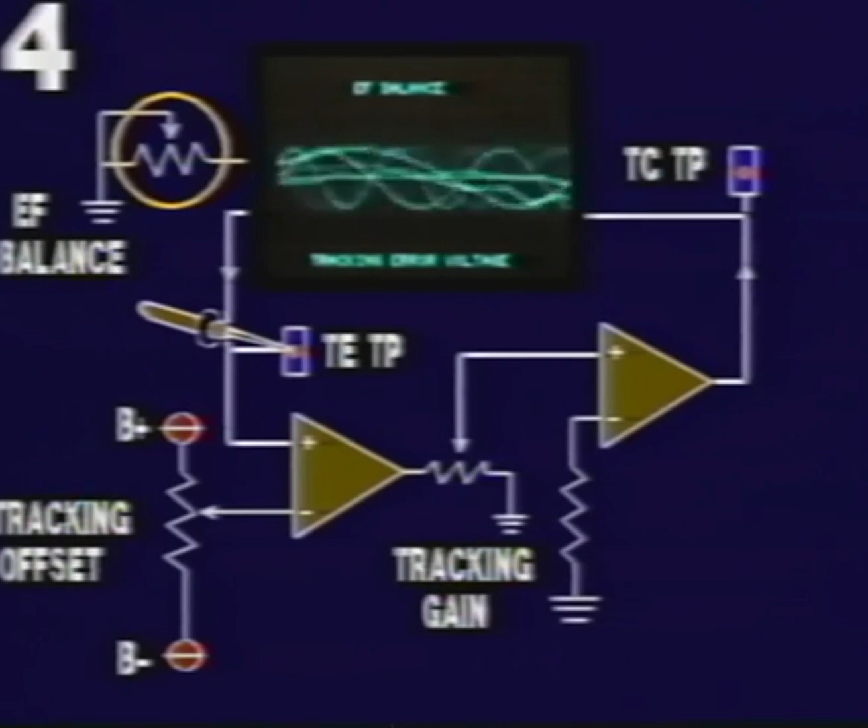The EF balance adjustment compensates for differences in the output of the two tracking sensor photodiodes, E and F. This adjustment may be made while viewing the tracking error voltage and adjusting the EF balance control for a symmetrical tracking error signal. The tracking offset adjustment compensates for component variances.

Its purpose is to set the DC output of the voltage amplifier to 0 when tracking is correct. This adjustment is usually made with the player in the stop mode. The tracking offset control is then adjusted for a specific DC voltage, usually 0 volts, at either the tracking error signal test point or the output of the tracking coil drive amplifier.

The tracking gain adjustment sets the level of the tracking correction voltage fed back to the pickup. Of course, if the gain adjustment is too low, the player will become extremely sensitive to vibration, and tracking may be completely or intermittently lost.

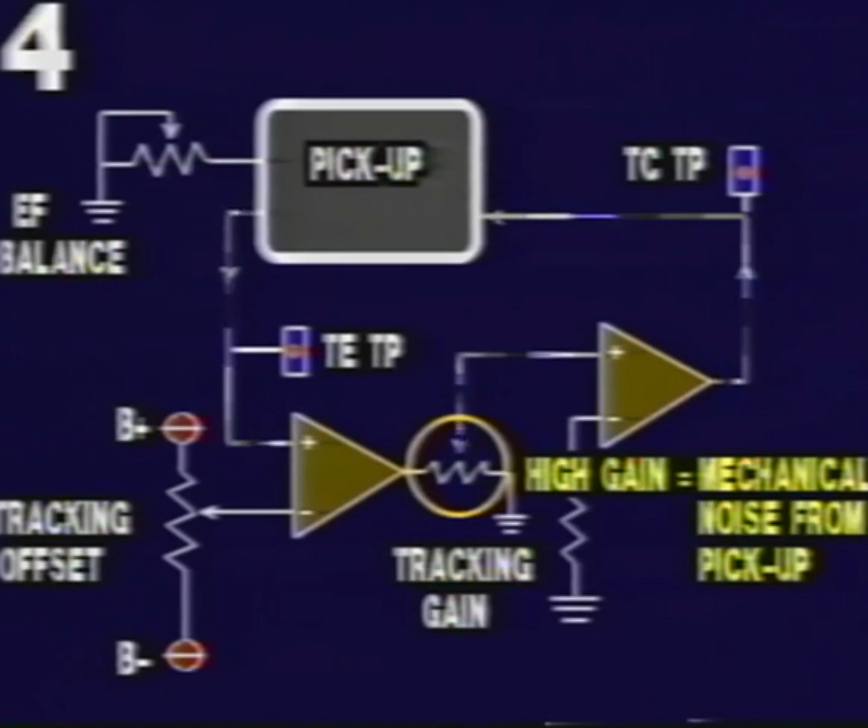If the tracking gain is set too high, a chirping noise will be generated by the pickup. This noise is due to the extreme movement of the tracking mirror in earlier model pickups and the optical unit in later versions.

A rough adjustment of the tracking gain may be performed by turning up the control until noise is generated from the pickup. At this point, note the position of the control. Next, rotate the control in the other direction until the player starts to lose tracking. Note the position of the control again. Then place the control midway between the two positions.

If a problem still exists, such as intermittent error or track skipping, a more precise tracking gain adjustment procedure is given in the service manual. Since the procedure is not the same on all units, refer to the specific service manual for that player.

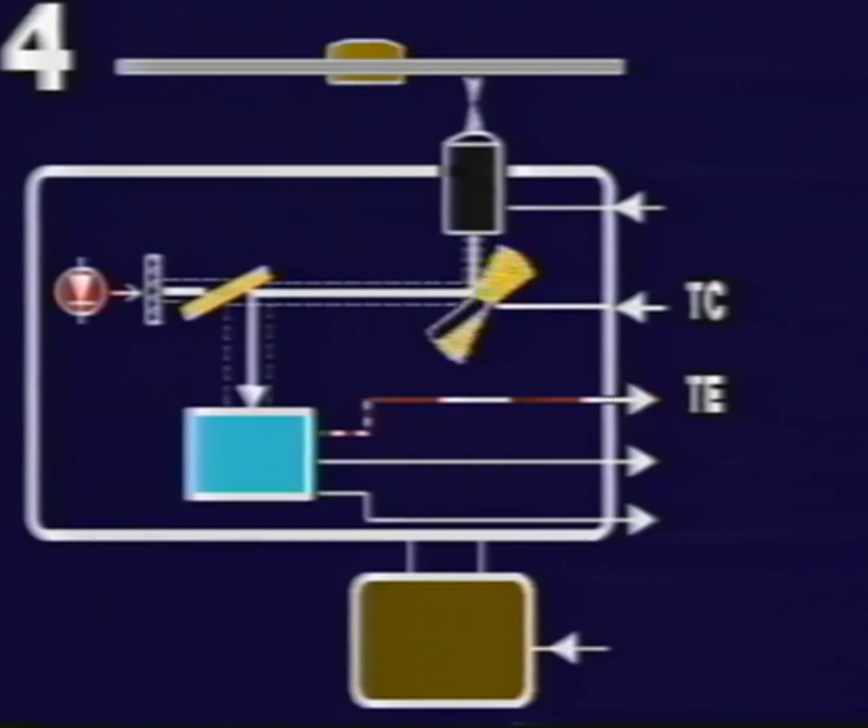If the tracking error voltage from the pickup is excessive, even after these three adjustments, the diffraction grating inside the pickup may require adjustment. This is described in Section 6 of the tape.

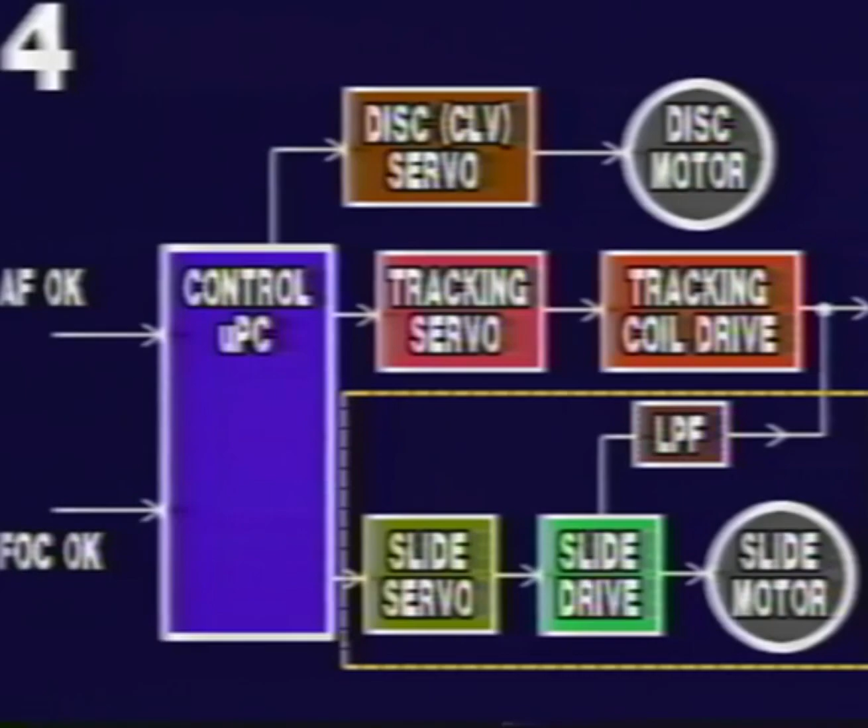If the player will read the table of contents, but is unable to access the music tracks of the disc, or the skip and search features of the player fail to respond, a failure in the slide motor system is probably the cause. However, before assuming that the slide motor servo system is at fault, check to be sure that the mechanism transport locks are released.

The slide servo amplifies the DC component of the tracking servo output, combines this with forward and reverse commands from the control system, then drives the slide to keep the pickup centered over the desired track of the disc.

Once again, the amplifier is divided into two major sections: a voltage amplifier to amplify the low amplitude DC signal from the tracking servo, and a power section to drive the slide motor.

If there is no signal from the low-pass filter reaching the voltage amplifier, the problem is either in the tracking servo section or the control system is not turning the slide servo on.

If the error voltage is present at the input to the amplifier, but no slide voltage appears at the output of the servo, look for a problem in the servo amplifiers.

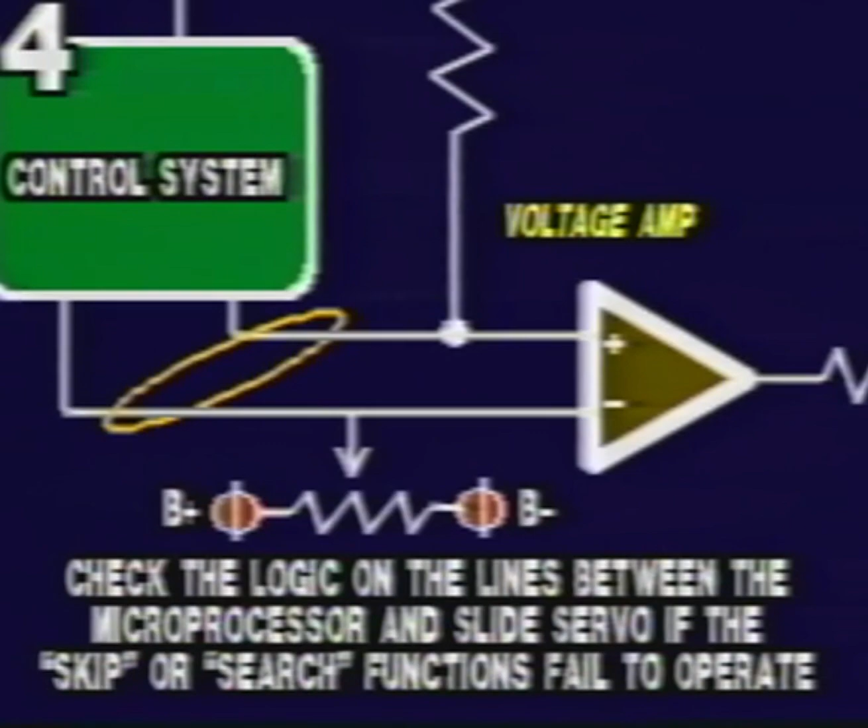If the player will track a disc, but the skip or search functions fail to operate properly, one or more of the control system outputs to the slide servo are probably incorrect. Check for the proper logic on these control lines.

While the servo gain is fixed in the majority of CD players, some units have a control to adjust the slide servo offset. The SS offset adjustment compensates for component variances. Its purpose is to set the output of the voltage amplifier to 0 when the slide servo has no input.

This adjustment is made with the player in the stop mode. The slide servo offset control is then adjusted for 0 volts DC at the output of the slide motor drive amplifier. On players with linear slide motors, the procedure is somewhat different, so consult the appropriate service manual for the complete procedure for the specific player concerned.

The disk drive servo, also referred to as constant linear velocity, seldom gives problems. However, many symptoms encountered while servicing disc players include no disk rotation. In the majority of cases, no disk rotation is not usually due to a defect in the disk drive servo, but results from the circuitry not being enabled.

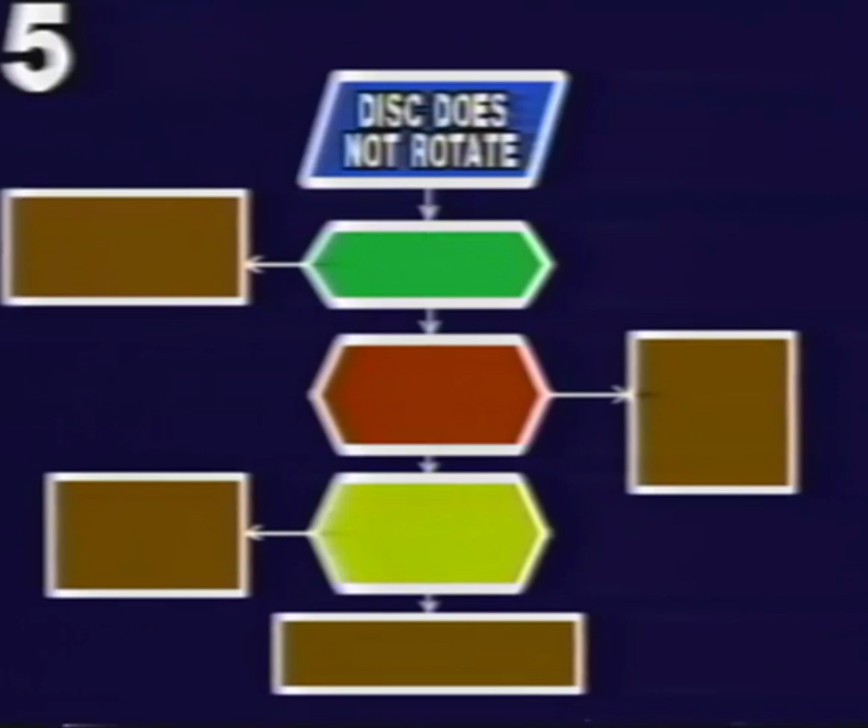Remember, focus must be found before the disk servo is enabled. Therefore, if the disk does not rotate, first determine if focus is attained. If focus is not found, troubleshoot the focus servo as described in Section 3 of the tape.

If focus is achieved, check whether or not the disk servo is enabled. The disk servo enable may be one or more command lines from the control circuitry, or, on later model players, may be a single serial data line.

If the disk servo is not enabled, check the control circuitry of the player. If the servo is enabled, check for an output from the servo circuitry. If a servo output exists, the problem is in the disk motor drive or the motor itself. If no output is detected from the servo, check the disk drive servo circuitry.

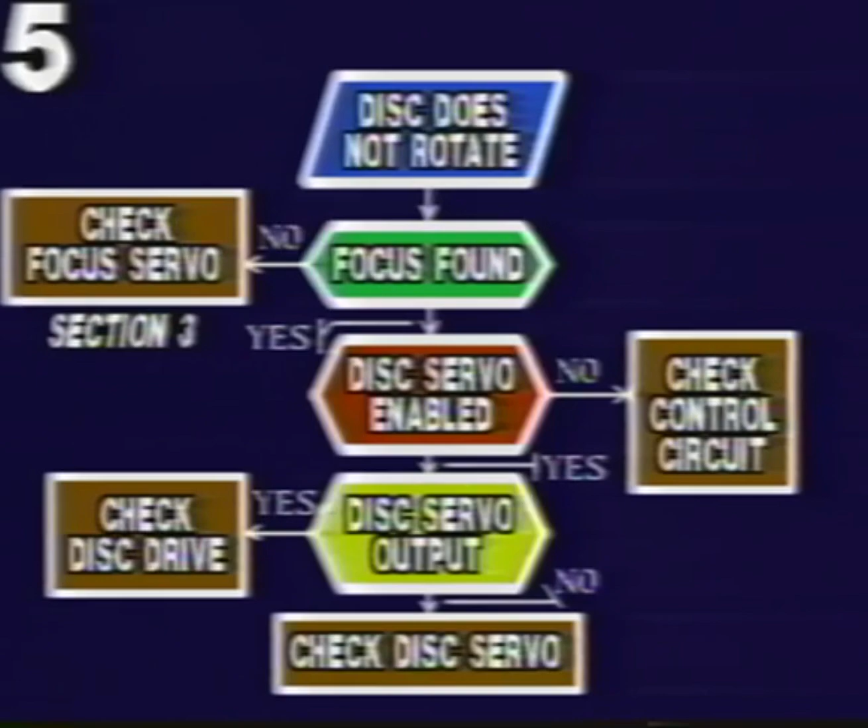The disk drive servo is comprised of 4 basic sections: a start-stop circuit, an automatic frequency control or AFC circuit, a constant linear velocity or CLV circuit, and the disk motor drive circuit.

The start-stop circuitry generates the initial drive to start the motor rotating. The automatic frequency control circuit roughly brings the motor to correct speed, and the constant linear velocity servo controls the disk's rotational speed so a constant linear velocity is maintained.

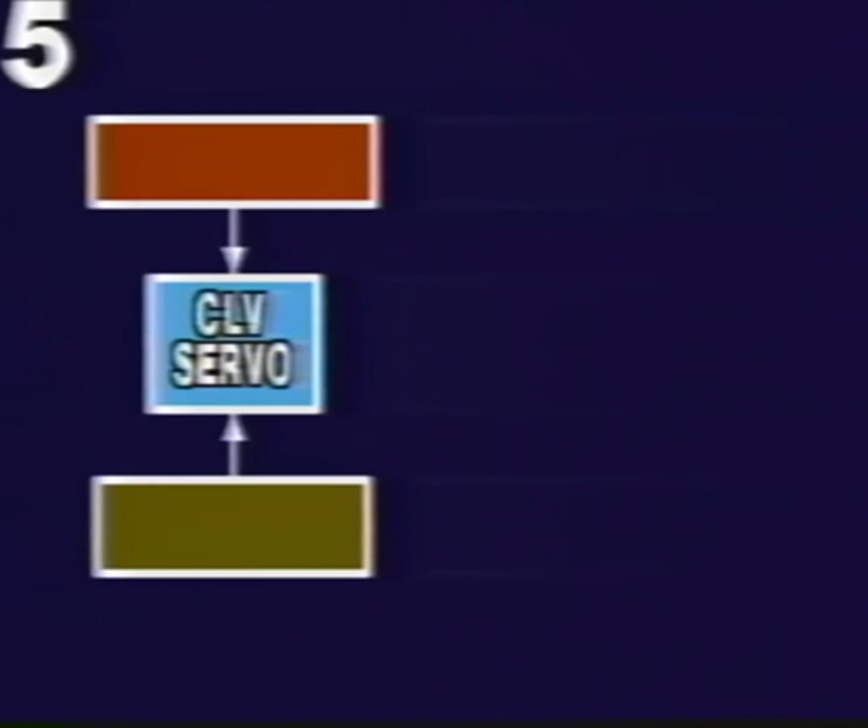The CLV servo is basically a phase lock loop configuration. As in all PLL circuitry, a comparison signal of the controlled device is compared against a standard reference, and if a difference exists, a correction voltage is generated.

In the CLV servo, the comparison signal must indicate the disk's current linear speed, that is, the rate at which the disk passes under the pickup. The comparison signal is derived from the PLL clock oscillator in the signal processing circuitry.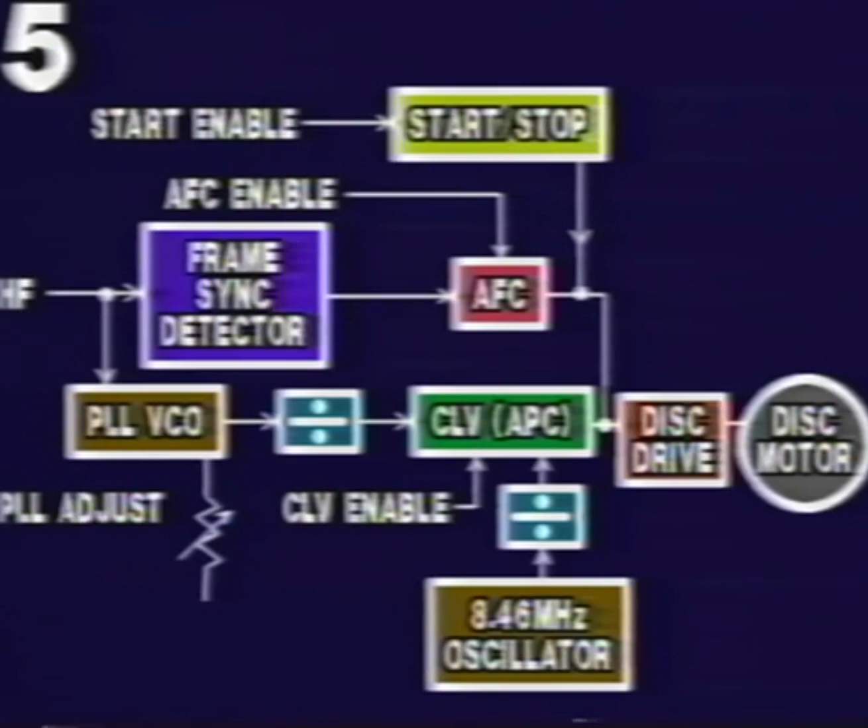The PLL clock is synchronized to transitions in the data train from the disk, and when the linear velocity is correct, the clock frequency is 4.321 MHz.

The stable reference is derived from a crystal-controlled 8.46 MHz oscillator, usually internal to the signal processing demodulator IC.

Divided samples of the comparison and reference signals are compared in the CLV servo, and if a difference in frequency or phase exists, a correction voltage is added to the disk drive.

The disk motor drive circuitry is a power amplifier, amplifying the CLV correction voltage and directing it to the disk motor. The output of the CLV circuit is an analog voltage on earlier model units and a pulse width modulated signal on later version players.

Let's follow the basic block diagram of the disk drive servo during the normal operational sequence. When focus is attained, the control circuitry enables the start-stop circuitry to initially start the motor's rotation.

Immediately afterwards, the AFC circuitry is enabled. The AFC circuitry utilizes the sync signals at the start of each audio frame on the disk. The frame synchronizing signals are separated from the rest of the HF signal and are directed to the AFC circuitry, which determines the initial rough drive for the disk motor from the frequency of the frame sync signals.

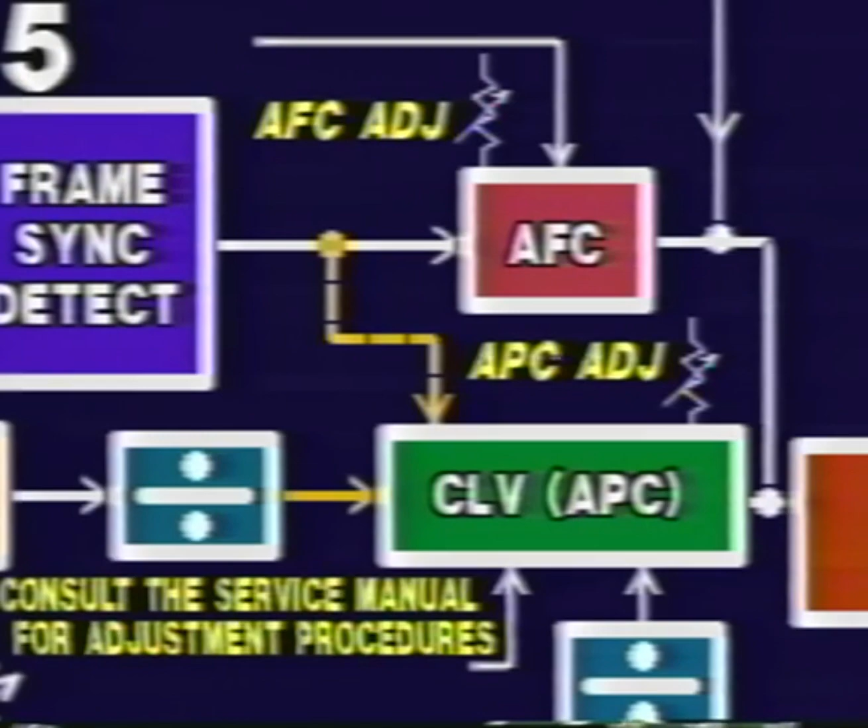Usually, the only adjustment in the disc servo is the free-running frequency of the PLL oscillator, and on many later model units, this adjustment has been eliminated. The PLL oscillator adjustment is performed by removing the HF signal from the input of the PLL oscillator and setting its frequency as close as possible to 4.321 MHz.

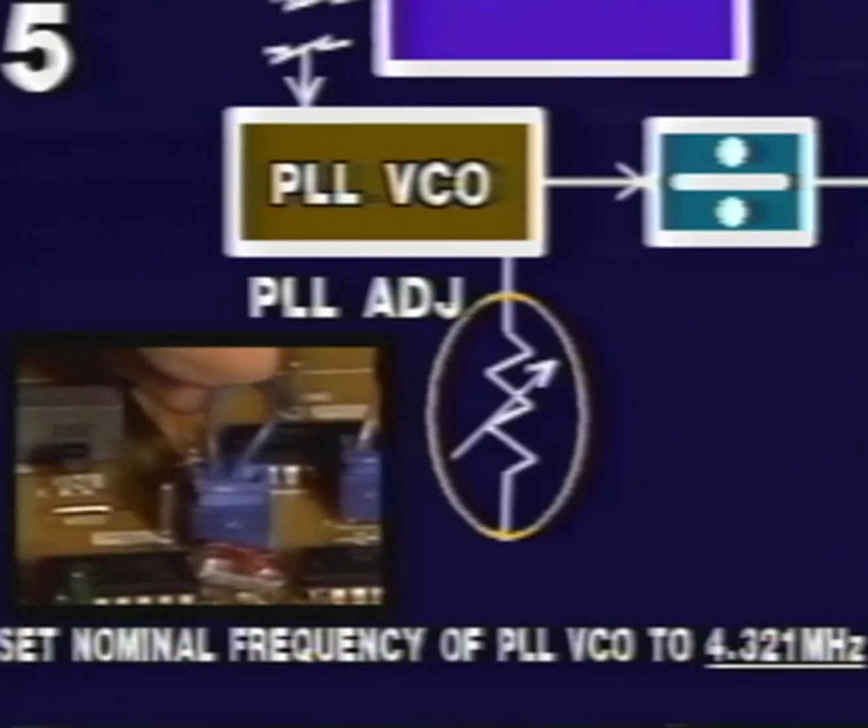Refer to the service manual for each specific model. But in general, the procedure usually involves shorting a test point to ground and adjusting the frequency of the oscillator to 4.321 MHz on a frequency counter.

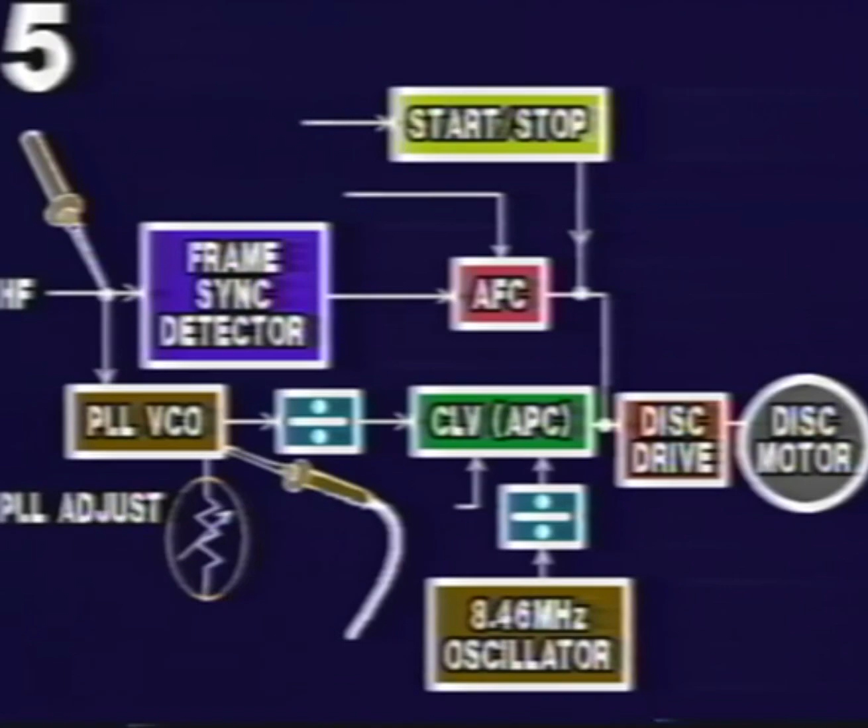To electrically check if the disk drive is correct, check for synchronization between the PLL oscillator and the HF signal. Connect one channel of an oscilloscope to the output of the PLL oscillator, and the second scope input to the HF signal test point. Trigger the scope from the PLL oscillator output and set the repetition rate to the digital frame rate, 7.35 kHz. When the two signals are in synchronization, the HF signal will remain stationary and not drift across the screen.

On later model units, the disk drive servo is internal to the signal processing demodulator IC. The servo is controlled by a serial data line from the control circuitry, usually denoted as data or MSD, microprocessor serial data. The timing for serial data transfer is controlled from a serial clock signal, also generated by the control circuitry.

The signal processing IC is enabled to accept disk servo commands by a latch line, usually denoted as MLA or XLT. These are the same control lines that control the focus and tracking servos in the servo IC. Since all data is serial, all that can be checked is that a change in data occurs, as described in Section 3.

If the unit searches for focus, the three lines, data, clock, and latch, are probably okay. However, if the microprocessor is not informed that focus is okay, it will not generate disk servo or tracking servo enable signals. Therefore, ensure that a data change occurs on the status line between the servo IC and the control microprocessor.

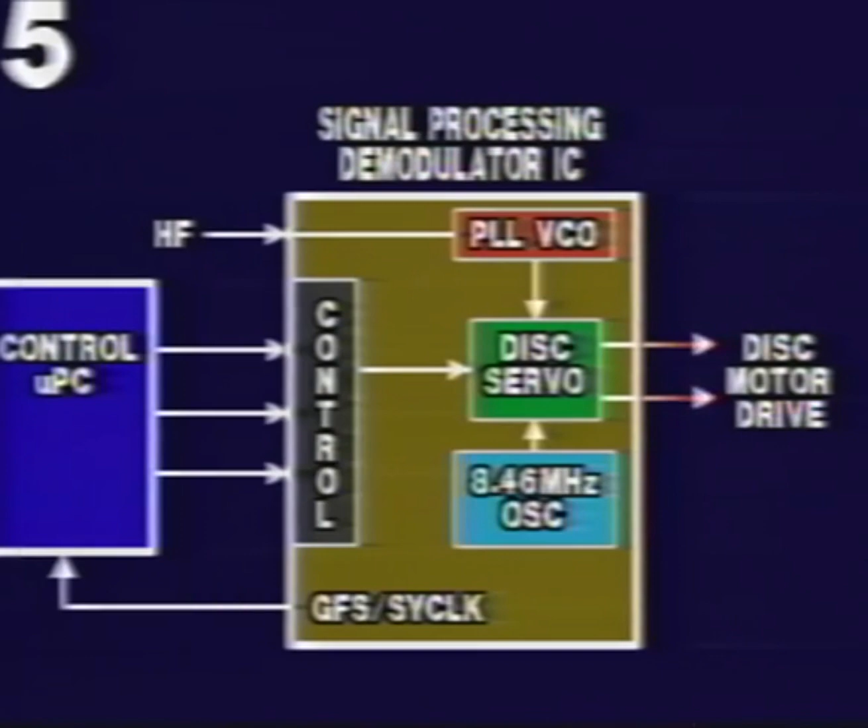The output of the CLV servo is amplified by the disk motor drive and is directed to the motor. On early model units, the CLV output is an analog voltage. Later version players utilize digital servos, and the output of the CLV is usually a pulse width modulated signal. In many cases, two PWM signals are generated 180 degrees apart.

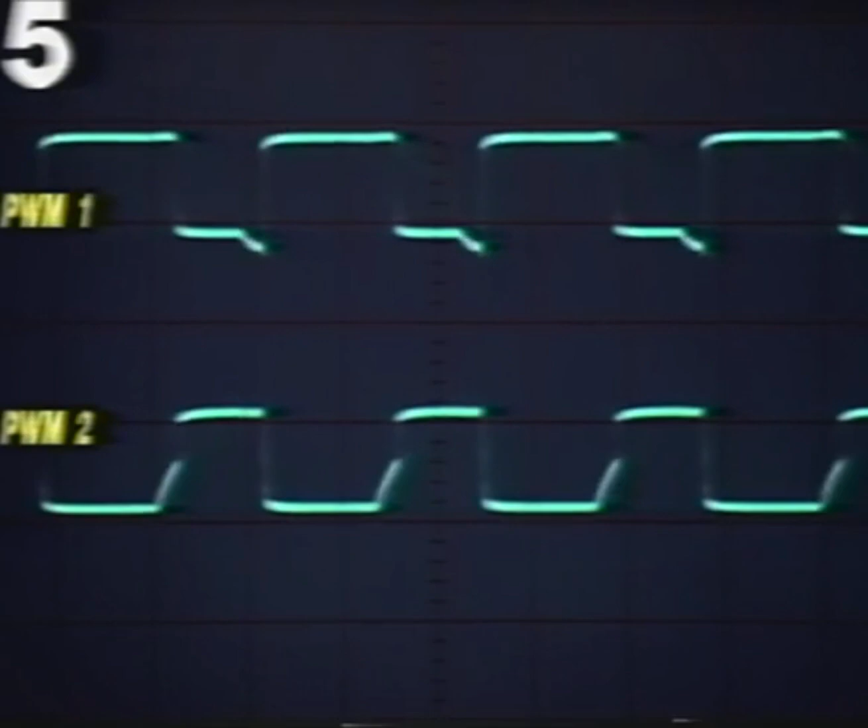If the CLV circuitry is responding, the duty cycle of the PWM signal should change when the disk is manually slowed. This is a good check to determine if the CLV circuit responds to changes in disk speed. If the CLV responds to disk speed, the problem may be in the disk motor drive, where conventional troubleshooting techniques may be used.

The mechanical adjustments in a disk player can be divided into two major groups: those affecting the pickup assembly operation, and those dealing with loading and unloading a disk from the player.

Three mechanical adjustments affect the operation of the pickup assembly: the disk height, jitter, and the internal diffraction grating. The design of the individual player will determine which of these adjustments are required. All three adjustments may not be possible on all players.

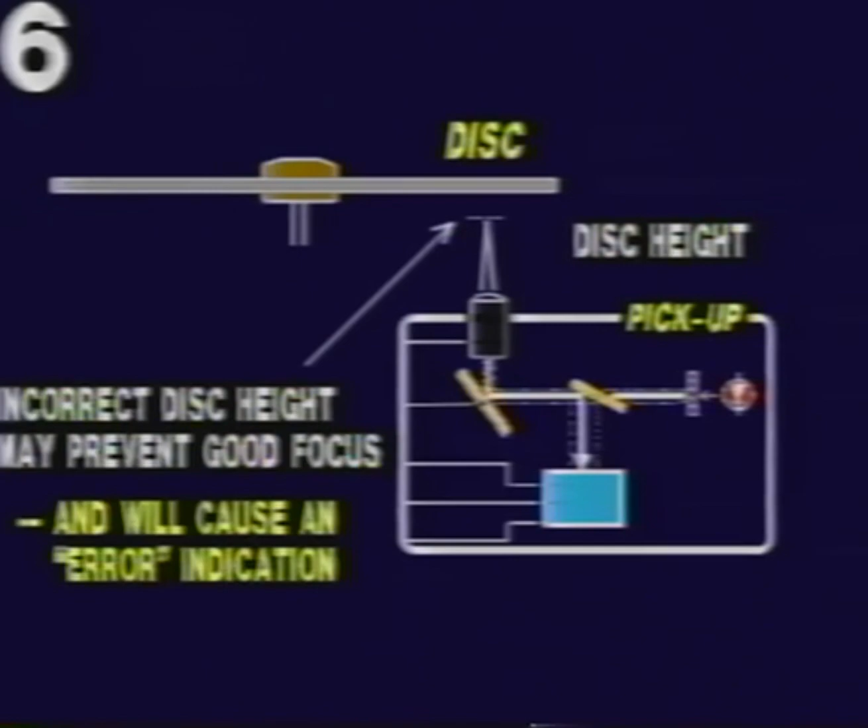The disc or turntable height adjustment determines the distance from the pickup assembly lens to the disc. If the distance is incorrect, the player will not be capable of finding good focus during the focus search cycle, and the player will register error.

Usually, the adjustment requires loosening a set screw in the turntable and adjusting the height to the value specified in the service manual for that specific player. Any mechanical problem that affects the turntable height can also prevent focus from being achieved. This is an especially important point to remember if the player has no turntable height adjustment.

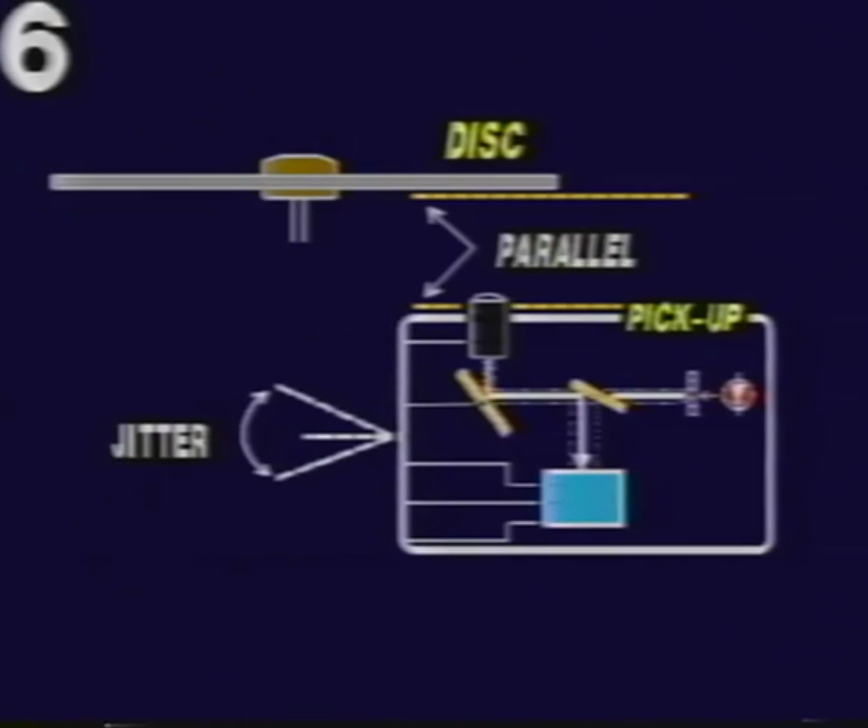Most players do have a jitter adjustment. This adjustment sets the plane of the pickup assembly parallel to the disc. The jitter adjustment is made while playing a disc and viewing the HF signal eye pattern on an oscilloscope. Rotate the jitter adjustment for optimum eye pattern, adjusting for minimum jitter and equal amplitude.

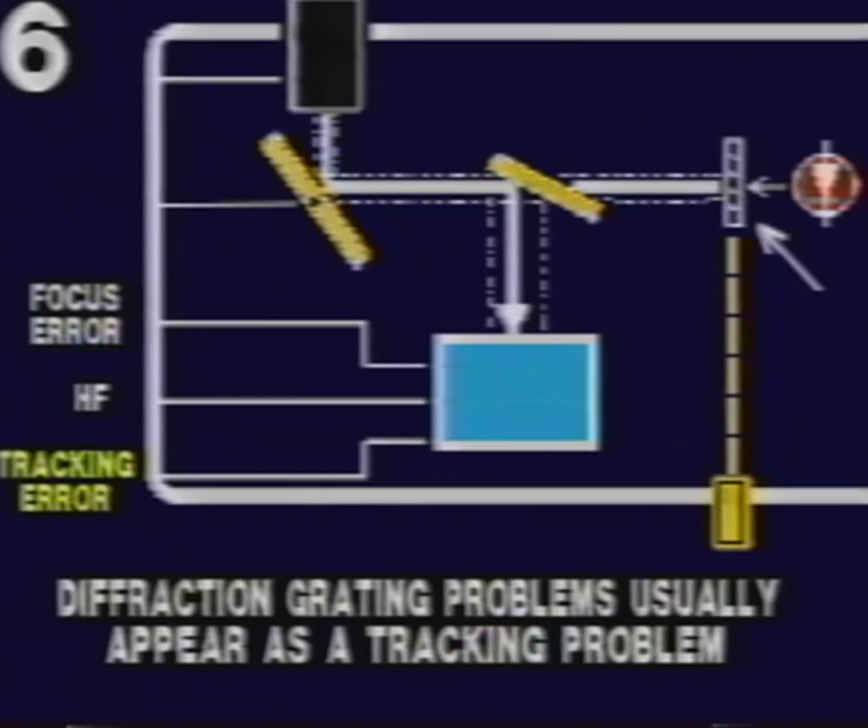Although all pickup assemblies have a diffraction grating, the adjustment itself is not always accessible. While an incorrect grating adjustment affects all signals from the pickup, it usually affects the tracking error signal to a greater degree. Therefore, a diffraction grating problem usually appears to be a tracking problem. In general, the grating adjustment is performed while viewing the tracking error voltage and adjusting the grating for minimum amplitude tracking error. Of course, when making the adjustment, refer to the appropriate service manual for the specific adjustment procedure.

Some units incorporate special test modes for making adjustments. When in a test mode, the diffraction grating is usually adjusted for maximum amplitude tracking error signal.

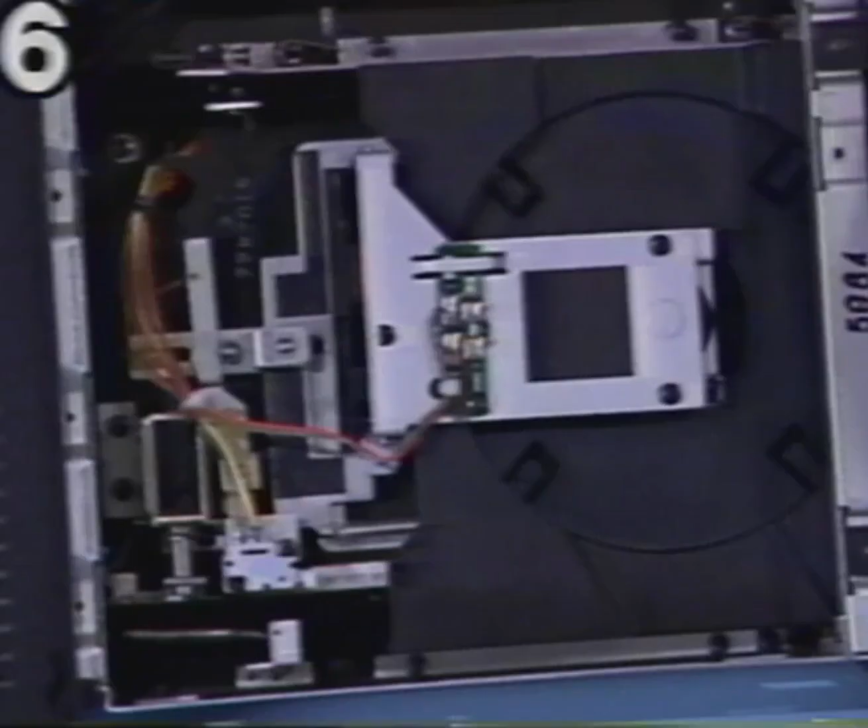Before most adjustments can be performed, a disc must be inserted in the player. Typically, this involves opening the drawer, inserting a disc, and then closing the drawer. The drawer operation is generally monitored by two status sensors, a drawer open sensor and a drawer close sensor.

The open and close sensors are usually mechanical switches activated by the position of the drawer. On many disc players, the positioning of these switches is adjustable, so refer to the player service manual for the correct adjustment procedure. If the close switch is defective or misadjusted, the drawer will usually close, but will automatically open again within a few seconds.

If the open switch is defective or misadjusted, the opposite symptom usually occurs. The drawer will open, then automatically close. On some units, an open switch problem will allow the drawer to open but not to be closed, since the switch position leads the control circuitry to believe that the drawer is already closed.

A third mechanical sensor is used in the player to sense when the pickup assembly is at the start or center of a disc. The sensor is usually a mechanical switch known as the inner switch and may or may not be adjustable depending on the player.

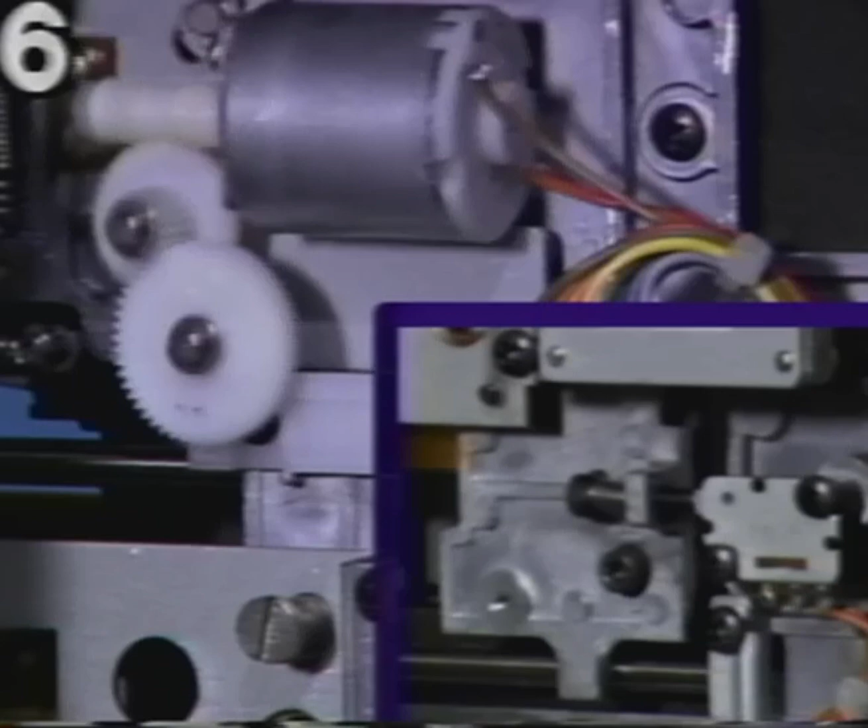Two symptoms are generally associated with a defective or misadjusted inner switch. If the inner position of the pickup is not detected, the pickup slide drive is not removed and the mechanism usually jams or freezes. If the inner switch position is incorrect, the pickup assembly will not be positioned over the start of a disc, the table of contents will not be read, and the player will register error.

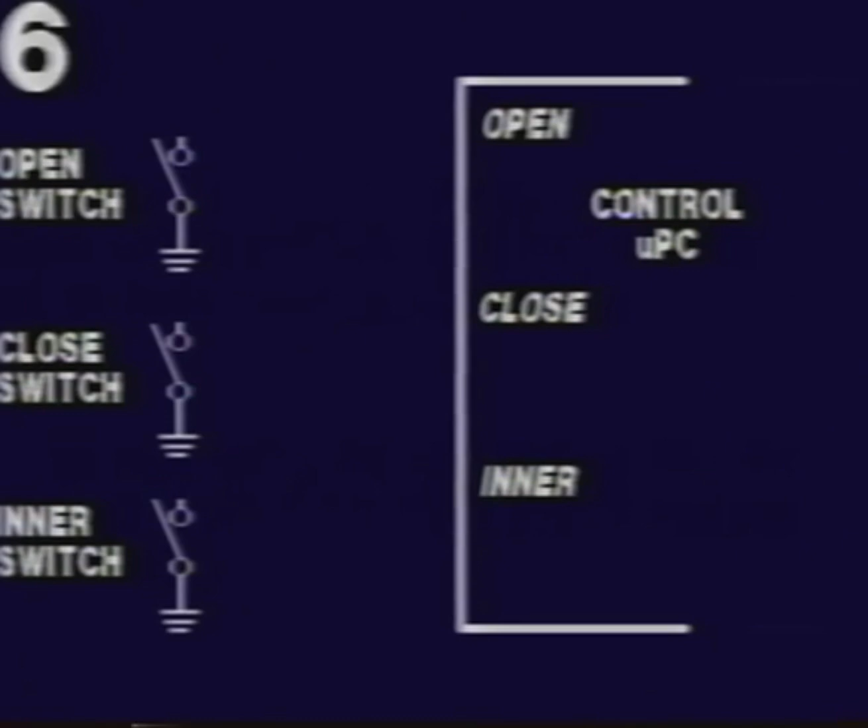Usually, the pickup is reset to the inner switch position when power is turned on or when stop is activated when playing a disc. On some units, the drawer will not open or close if the inner switch position is not detected. On earlier players, the open, close, and inner switches controlled the logic at an input of the control microprocessor, generating either a high or low.

On later players, the three sensor switches either direct or remove a scanner signal from the microprocessor scanner input port. Since all three of the sensors are mechanical and monitor the mechanical operation of the unit, they are a principal source of problems in a disc player.